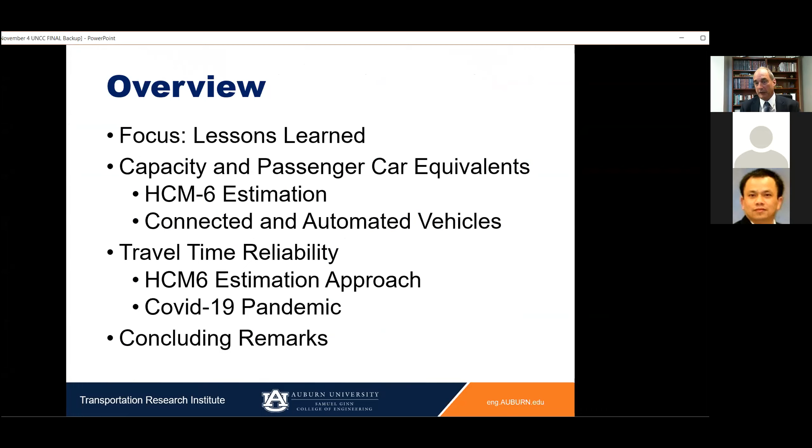I'm going to talk about some of the work we've done in the last 5 years. Our focus is going to be on lessons learned, so I'm probably not going to go deep into a lot of things, but more to give you some insight into some of the things we've learned in the HCM 6, Highway Capacity Manual 6, work, particularly related to passenger car equivalents and travel time reliability. And then I'll provide some concluding remarks.

In terms of capacity and passenger car equivalents from the HCM 6, as you all know, passenger car equivalents are a way of translating mixed vehicle flow to equivalent passenger car only flow rates. They've been around a long time, probably as long as there have been highway capacity manuals. What's interesting about Highway Capacity Manual 6 is that instead of using empirical data to do these things for freeways, they used the VISSIM microsimulation model.

In particular, version 4.4. When we started the work, it was about 2 years after the HCM 6 came out, and VISSIM 4.4 was no longer available, so we had VISSIM 9. The first thing we had to do was make sure the two were compatible. So everything you're going to see, we ran and made sure that the results we were getting from VISSIM 9 actually matched what was produced in the HCM 6. They weren't going to be exact because simulation has stochasticity in it, but we did make sure statistically they were the same. So we're getting the same capacity values, the same capacity adjustment factors, the same PCE values.

For those of you who aren't familiar, I'm going to go briefly into how the HCM 6 developers did their work. They created a VISSIM model with a level section and a grade section, and that model had 3 lanes per direction. They used a percentage of single unit trucks and tractor trailers, and assumed that all vehicles have a desire to go the same speed of 70 miles per hour. They used the VISSIM default values for car following. So that was basically the approach they took.

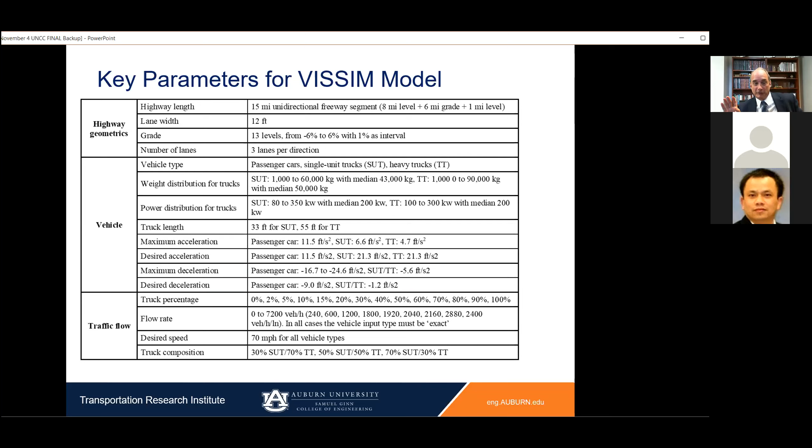For those of you who are familiar with VISSIM, there's a lot of parameters, and I'm just putting up this slide to show you there's a lot of parameters, and I'm not even showing them all. But if you're going to replicate what the HCM6 does, you really have to understand what they were using. One thing I wanted to highlight: in their analyses, when they developed HCM6, they actually developed it based on an aggregation interval of 1 minute. To my knowledge, this is the first time the HCM ever used anything different than 15 minutes to calculate capacity values, and I'll come back to why this is important later on in the talk.

So essentially what the developers did was develop a number of scenarios. They had passenger only conditions, 13 grade levels and 7 distances, giving 91 scenarios. They also had 13 grade levels, 7 distances, 13 truck percentages, and 3 truck composition levels, giving them 3,549 scenarios, for a total of 3,640 scenarios.

So they did a lot of simulations to get to what was in the HCM. You can imagine this is not a small thing to do. When we did it, we actually went through and automated everything. You can only imagine having someone try and run these one after another on VISSIM.

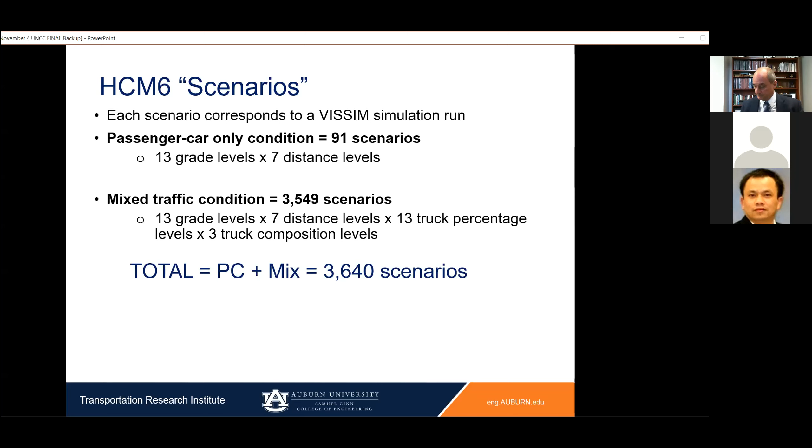To give you an example of how it works, how the PCEs were calculated, I'll take one example. One of the scenarios: 20% trucks, truck composition level 30% SUT and 70% tractor trailer, grade level 3%, grade distance 1 mile. So if you go to the HCM, you can look up the PCE value for that situation.

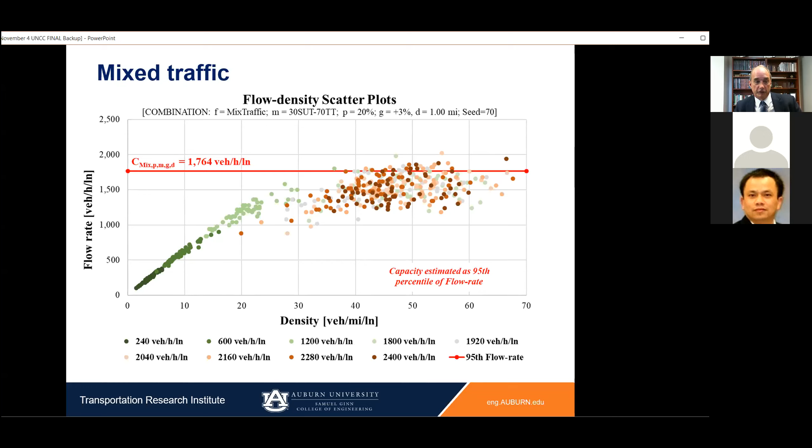So you did it for passenger cars, then you run the simulation for mixed traffic, again flow rate versus density. You find the capacity, in this case the 95th percentile value is 1764 vehicles per hour per lane. You then calculate the capacity adjustment factor, which is just the ratio of the two, it's 0.78.

Once you have the capacity adjustment factor, you can use the equation to calculate the passenger car equivalent. For this example, the HCM procedure would say that based on the simulations, one truck is equal to 2.43 passenger cars when you're looking at traffic flow for this situation. And of course, they did it for all those different scenarios and came up with different PCE values.

It's a bit more complicated than I'm putting on. If you look at the way they did it, it was a 5-step process. I just described the first 2 steps. They went through, did all those flow plots, got the capacities, and calculated the capacity adjustment factors as I showed.

It turns out that those capacity adjustment factors have a bit of variability in them—well, actually a lot. They weren't very smooth, so they decided to go through and smooth them out using a regression model. It was a fairly sophisticated regression model, with 15 parameters, so I'm not going to go into it. It's in the literature on how they did it.

When I first saw how they were doing it, I thought, why didn't they just put the equations in the HCM? And then when I saw the equation, I said, well, it's obvious why they didn't—we're not going to go and use 15 parameters to calculate CAF for PCEs.

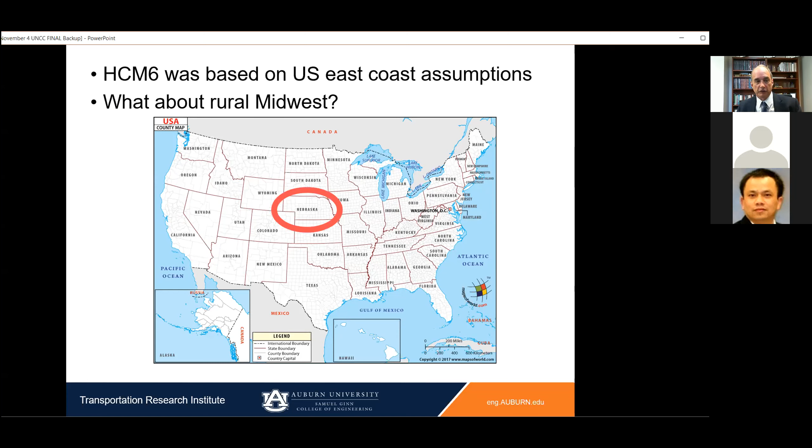HCM6 was based on East Coast assumptions, so it was 3 lanes—the VISSIM model was for the East Coast. We had a question about what about the rural Midwest, what about places that didn't have 3 lanes of traffic. Our focus was Nebraska, because that happened to be where I was working at the time at the University of Nebraska, Lincoln.

We went out and collected a lot of data on the interstate there. An interesting thing about the Western US is that there are high truck percentages—for where we were collecting, they ranged anywhere from 20 to 45%. For those familiar with the HCM, you know that the PCEs only go up to 25, so we were well beyond that in a lot of our data collection sites. And there are places in the Western US where the truck rates are even higher.

What did we find? We looked at free flow speed distribution. Remember, the HCM assumed one value of 70 miles per hour, essentially. For passenger cars, the average was 72 miles per hour. Out west in Nebraska and west of that, the typical speed limit on the interstate is 75 miles per hour. So this isn't all that surprising that the speeds were high.

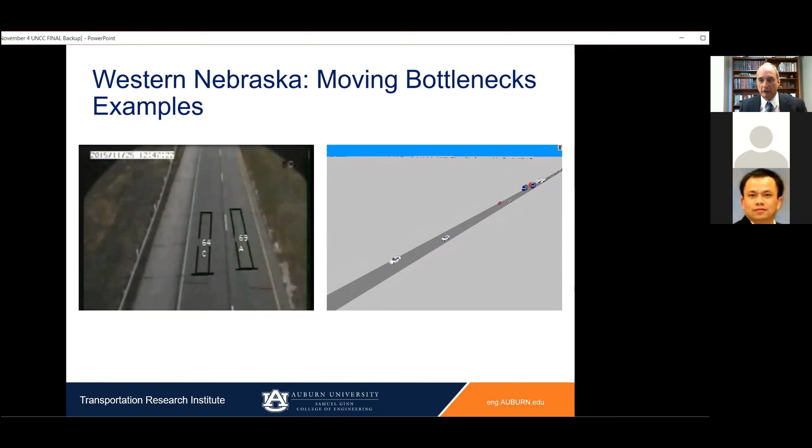Our goal was to go through and estimate the PCE for Western US conditions. So we wanted 2 lanes, we wanted our tractor distribution, we wanted to use the speed distributions we were seeing, and we wanted to calibrate the model to what we were seeing in the field. And we did all that.

This was the result. On this graph, this is the passenger car equivalents using the VISSIM approach, or the HCM6 approach. On the y-axis is the passenger car equivalents, on the x-axis is truck percentage. The different lines are based on different distances and grades. I'm not going to go into them, but basically the green one shows the HCM6 values, which comes out to about 2 per truck on average. In the Western US, the equivalent values are above that, in red.

You can see it varies based on truck percentage, but they're about 54% higher. So what we're seeing is that if you followed the HCM6 procedure in the West, the values were 54% higher.

There are a number of ways of taking this. You could say the HCM6 doesn't really apply. I take the approach that we now have a tool we can apply for our own conditions. So instead of having one set of passenger car equivalent values, you can tailor it down to your own region. This is our region, these are the type of things we have. It's not equivalent - Nebraska is not equivalent to New York, for example.

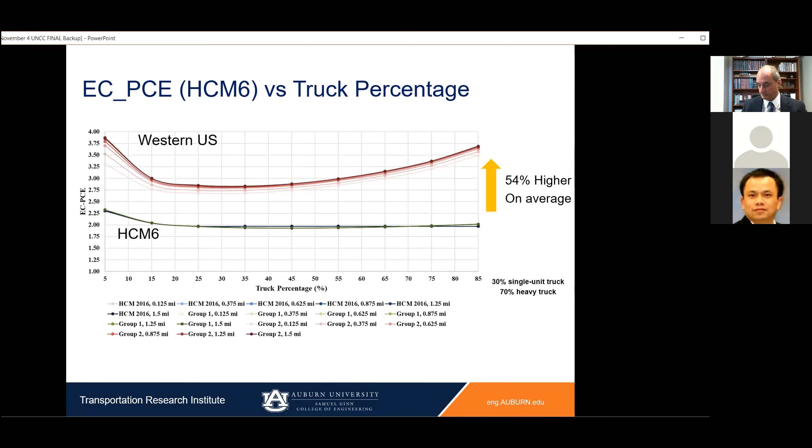So what are the lessons learned on what I just talked about? Well, we've now gone to this world where we're using simulation to model the HCM parameters and metrics.

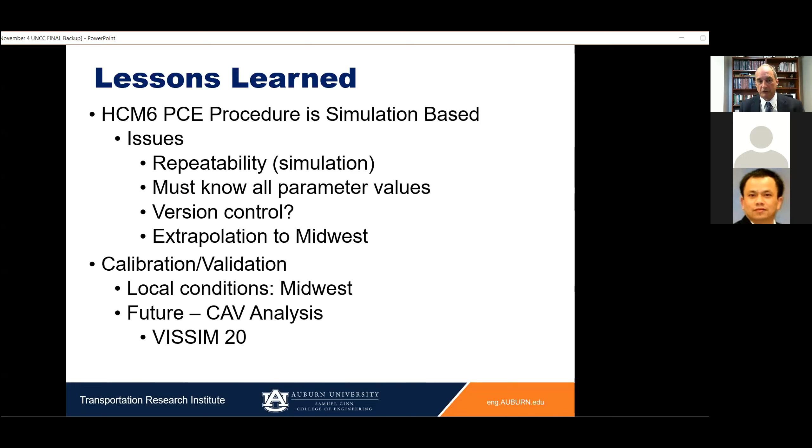The future, the connected and automated vehicles, which is what I was talking about in the title. VISSIM 20 allows you to model connected and automated vehicles. I just wanted to point out that you have to be really careful about just picking VISSIM 20, running it, and then comparing it to the HCM, because there are version control issues, and I'll talk more about that in the next few slides.

I also wanted to point out that this 15 parameter model is pretty complicated. We actually went through and took all our data and said, can we come up with a simpler model? We came up with one that had 6 parameters that looked at the percentage of trucks, the truck length, and the grade, the grade length and the grade itself, and came up with one that's fairly simple.

Getting to the compatibility issue, one of the things I wanted to talk about was VISSIM 4.4 is no longer available. That's what the HCM6 was based on. We just discussed previously that when we compared it to VISSIM 9, it worked really well. They gave statistically similar results.

However, when we looked at VISSIM 11 and VISSIM 20, further releases, when we looked at them on the modeling on mixed traffic, it worked out well. It compared very well to 4.4, but on the passenger cars, it didn't. So on the bottom graph here, you can see the red is VISSIM 9 or VISSIM 4.4 type results in capacity. On the left is depending on whether you're using 95% capacity or 100%. But the key point is that the orange and the blue, that's VISSIM 11 and 20, don't compare well to VISSIM 9. So if you just took VISSIM 20 and ran it and did the whole capacity thing again, you could get into trouble if you're comparing it.

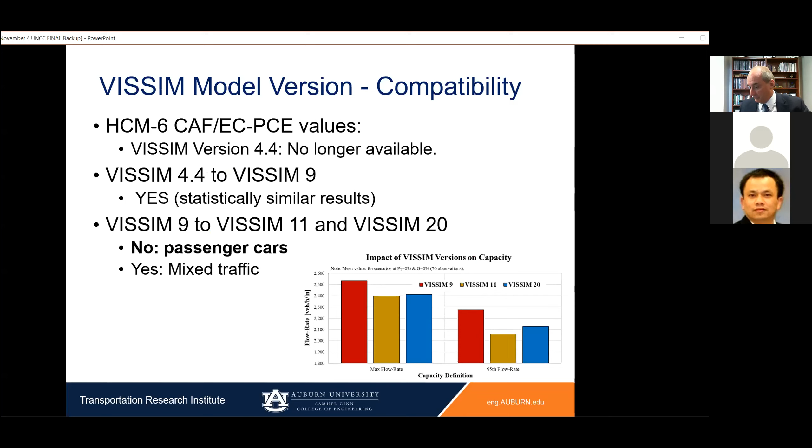So we kind of had an issue. When we looked at connected and automated commercial vehicles, we took the passenger cars as VISSIM 9 because we knew that. We took the capacity values because we knew that compared well to HCM6. We knew VISSIM 20, the mixed flow, worked well to VISSIM 4.4 and VISSIM 9. That allowed us to go, well, let's look at what happens when we do connected vehicles. We know we can replicate what we were doing before. Let's see what happens when you do connected vehicles. That's what we essentially did.

We were assuming all trucks were operating as CAVs. We assumed 100% market penetration. We took a platoon size of 7, and we compared what would happen for the CAV using the HCM model. And this is the results.

We have the passenger car equivalents on the y-axis. On the x-axis is truck percentage. We have a number of combinations you can look at: 0 grade, different grades, different grade lengths. That's what it shows. On average, it was 34% lower. I don't want to go into every combination because that could take an hour looking at all these things, but I wanted to get across a couple of points. Obviously, the CAVs increased capacity.

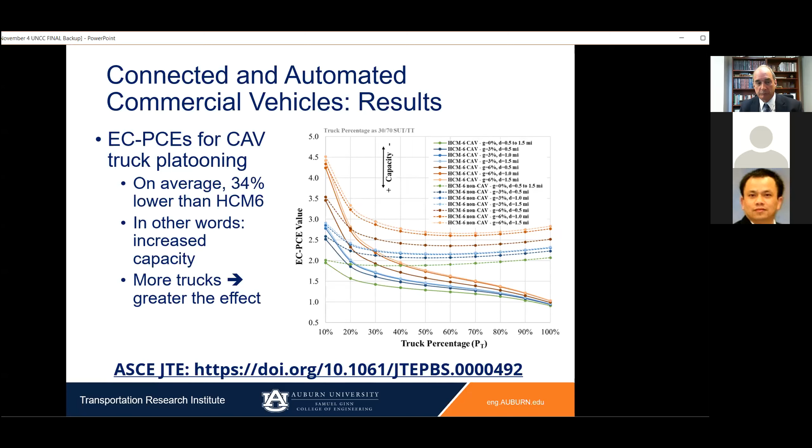In our analysis, it was 34% on average. Again, it depends on the grade length, percentage of trucks, and we did all of those types of sensitivity analysis. There's a paper out on it, and I put the reference there if you want to find out more. I think what I really wanted to get across is that, yes, you can measure CAVs, but you have to be very careful to compare apples to apples.

If we had just taken VISSIM 20 and ran it, we would have gotten different results when compared to the HCM than the way we actually did it, because we had checked to make sure that it was compatible with the earlier versions. So the question is, if we had done that, would the changes have been due to the CAV or the changes in the VISSIM code? That's sort of a warning for everyone.

Other issues that come up: common definition of capacity. I've always argued we should stick with the capacity. If it's 100% through the HCM6 or the HCM, it should be that way everywhere. And if we're using 15 minutes everywhere in the HCM, we should probably use it in this analysis as well.

Again, these are lessons learned, probably for HCM7. So as we go forward, how do we keep track of compatibility between versions of VISSIM? If we're going to continue to use simulation, how do we make sure that we're comparing apples to apples? How do we make sure we have the right definitions of capacity and aggregation? And how do we validate the simulation, calibrate and validate the simulation model for our local conditions?

The second thing I wanted to talk about in terms of metrics is still the HCM, but looking at travel time reliability. There's a lot of definitions - I'm just going to take the HCM 6.1. Historically, we've measured system performance by point estimates: mean travel time, 95th percentile travel time. Recently, I'll say the last 10, 15, 20 years, we've moved into travel time reliability. Lots of definitions - I can give you 4 or 5 off the top of my head.

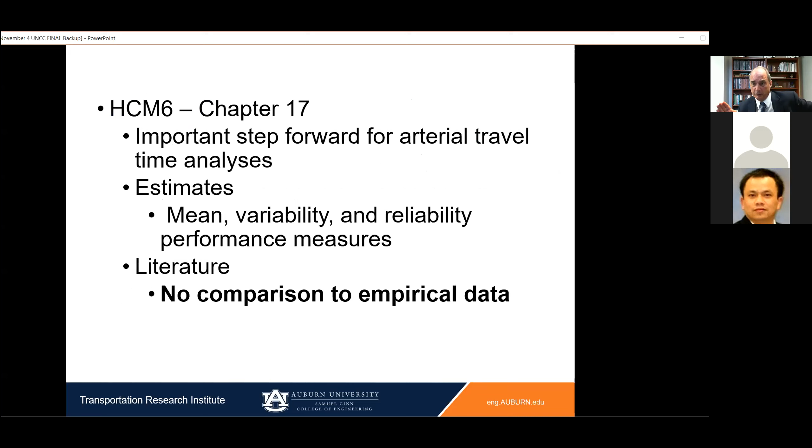So the approach is pretty straightforward. They have a way in the HCM6, as you know, of estimating travel time. What they did was put in a Monte Carlo simulation where they said, tell us how many rain days or snow days you have, tell me how many incidents you're going to have, tell me what your demand variation is like. You put all of that into their program, and you say I'm going to do weekdays through the year from AM peak, and it'll go through and estimate a series of travel times. You get to choose if it's 15-minute or 1 hour intervals.

But the end result is you come up with a travel time distribution. So you can estimate a travel time distribution, and from that calculate your travel time reliability metrics - a very straightforward way of approaching it. If you have all the information, you can use it to forecast, or use it to back-estimate. Because we had a lot of information, we could go through and check how accurate it was. We know, for example, on a certain corridor, how many snow days we had, how many incidents we had, and sometimes we know what the demand is.

So we can go get our own travel time distribution and compare it to the HCM, which is what we did. In travel time data collection in the US, historically it was done by government, speed detectors, loop detectors, radar, video. Increasingly, it's the private sector, cell phone location, Bluetooth data. There's a number of companies out there, Streetlight, ClearGuide, INRIX, that do it. I'm going to be using INRIX data today, but any of them could be used for what I'm talking about.

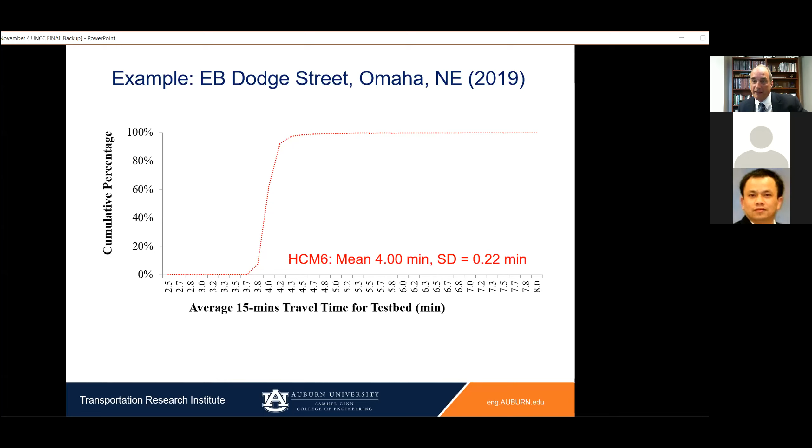We then went out and got the INRIX data for the exact same corridor for the same thing we were modeling, and we got that. So mean was close, standard deviation was not close. We did this for 9 other corridors throughout some urban areas, very high density, low level of service during the peaks, and none of them fit. Nothing really worked.

We did go through and find a way to calibrate it, so we could calibrate the model, and that can be done. I'll give you the reference for that. But the interesting thing was we could not use the HCM6 travel time reliability model and get results that even look anything like the empirical ones.

So lessons learned: we're no longer measuring performance by a single measure. That's probably a good thing. Reliability is a function of travel time. There's no clear definition, but it has to do with the mean, variance, and 95th percentiles. HCM uses simulation to model the travel time, but it wasn't calibrated to any empirical data. So I'd caution you from using it without checking whether it's valid or without validating it for your area.

Okay, and the good thing is now we have lots of travel time data. If you have travel time data, you can actually calibrate it. And I gave you the reference on this slide.

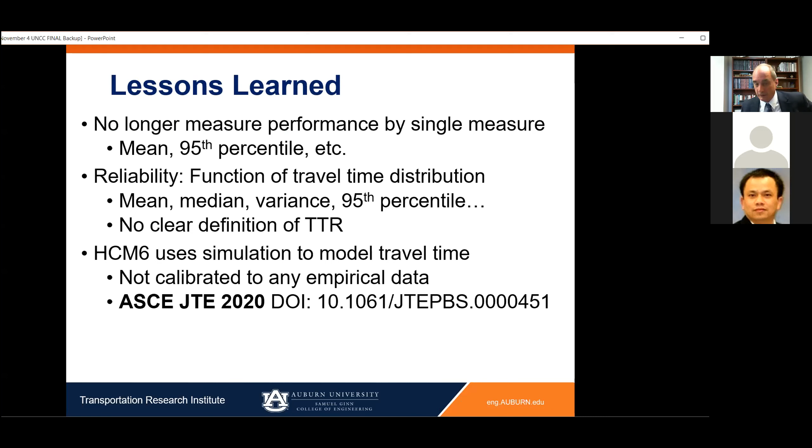So going from travel time measurement using HCM6, what I want to do is finish off with the COVID-19 pandemic and travel time reliability. We had the pandemic, there was a lot of things that went on. Is travel in the US roadways safer? Well, the number of deaths went down, but the crash rate went up, because the number of deaths decreased slower than the decrease in volume.

What we were interested in looking at was whether the travel time reliability was actually better, whether travel time is more reliable during the pandemic. But more importantly, we wanted to look at what metrics were best at capturing this. So let me show you an example.

We used INRIX travel time data. We used AM peak, PM peak, 15-minute subperiods. We used average travel times. And we looked at March, April, and May, the height of the pandemic 2020, and compared it to 2018 and 2019. So we looked at 4 corridors, 2 peak periods, 2 directions - 16 scenarios.

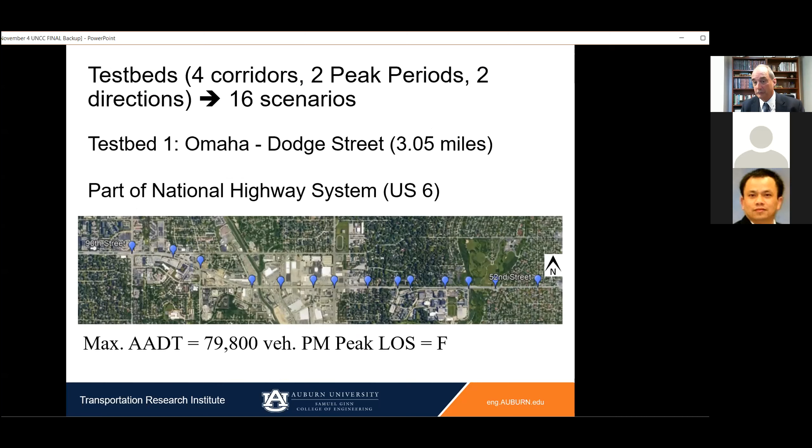This one I'm showing is Omaha Dodge Street, 3-mile section. It's part of the national highway system - I'll explain why that's important in a minute. And the max AADT was about 80,000 vehicles, so peak level of service was F. So it's a pretty congested arterial roadway.

We looked at this across, this is typical, the one I just showed you. We looked at all 16 scenarios. The average drop was 14% in mean. The average drop in standard deviation was 43%.

The coefficient of variation, which is a measure of the spread to the mean, dropped 34%. So our conclusion: no matter how you define travel time, it was more reliable during the pandemic, regardless of the definition. I don't think anyone's surprised by that. We had much less traffic. Your travel times are going to be more reliable, lower and with less spread.

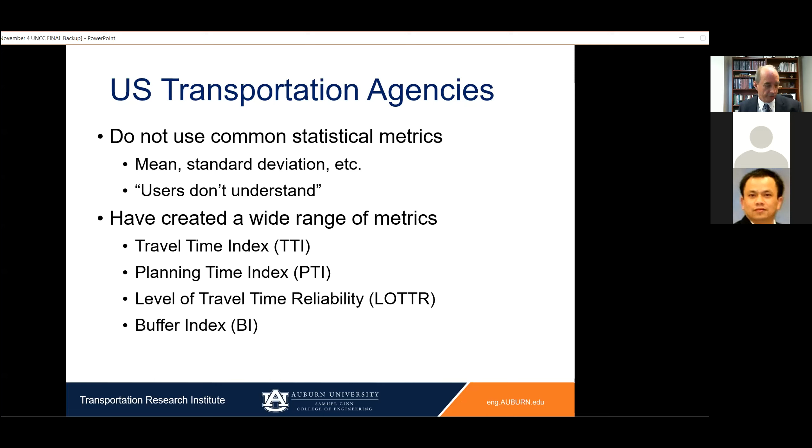What we really want to do is look at the metrics. US transportation agencies don't tend to use those common metrics I just described, mean, standard deviation. The argument is that users don't understand them. So people have created a wide range of metrics, travel time index, planning time index, and I'm going to talk about these in the next few slides.

Travel time index is simply the mean travel time over the free flow travel time. So how much more time will I need to travel a corridor compared to free flow conditions? If you look at the formula, it only considers mean travel time. If you look at the difference during the pandemic, the average drop was 14%, which was the same as the mean analysis. And it makes sense. The only thing changing is the mean.

So if you're looking at travel time index or you're looking at mean and you're comparing them from year to year, it's the same analysis. It's not going to change because the travel time index is just a mean divided by a constant.

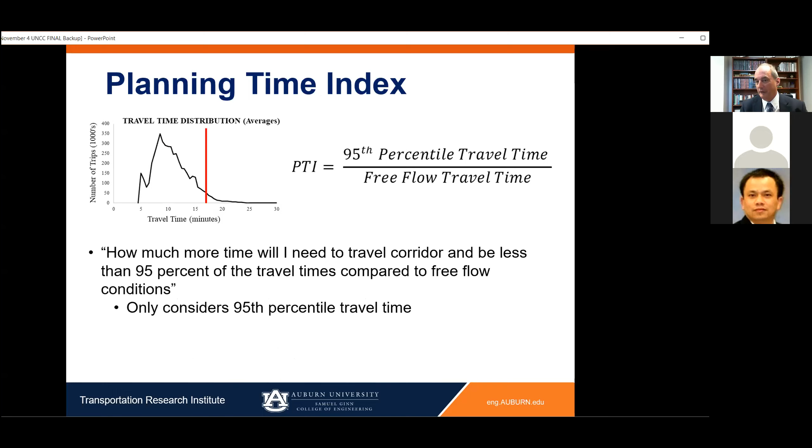Planning time index is similar. On the numerator, there's a 95th percentile travel time, still divided by the free flow travel time. It's trying to capture how much longer you have to get there if you want to be on time 19 out of 20 times.

It dropped during the pandemic by about 20%. So again, you're still getting this idea that there's more reliability.

The level of travel time reliability metric is defined as the 80th percentile travel time over the 50th percentile travel time. This one's important because it's used by the US National Highway System. So I just showed you an example from the US National Highway System in Dodge Street in Omaha.

This is required by MAP 21, by the FAST Act. This is how we measure reliability in the United States on our national highway system. If you look at these numbers from 2020, from the pandemic to the non-pandemic, the average drop was minus 3%. So it went down, but only 3%.

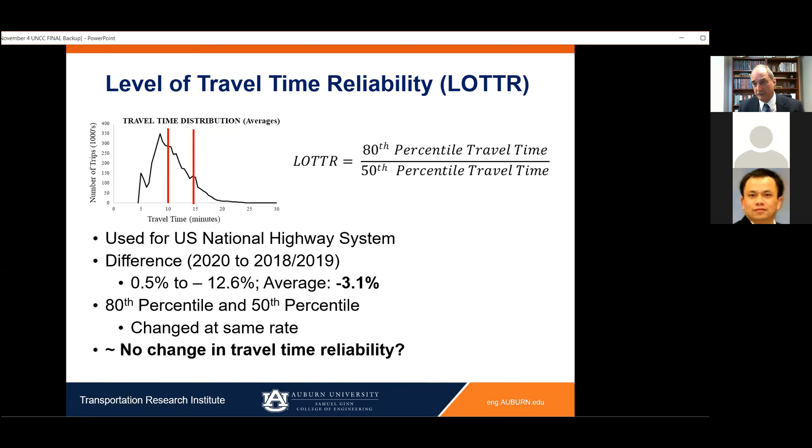Why was that? It turned out that the 80th and 50th percentile both decreased at about the same rate, which meant there was no change in travel time reliability if you want to use this metric. I say no change, 3%, very little change in reliability. So if you use this metric, you'd say, oh, there might not be too much.

The last one I want to talk about is the buffer index. It's a measure of spread: 95th minus the mean, divided by the mean travel time. It's a measure of dispersion and central tendency, very similar to the coefficient of variation I said earlier. Not surprisingly, it had the same kind of drop as the COV, about 34%. And remember, the argument is people can't understand the COV, but they can understand the buffer index. They're essentially measuring the same thing. So I'll let you decide whether that's a true statement, that people can't really understand it.

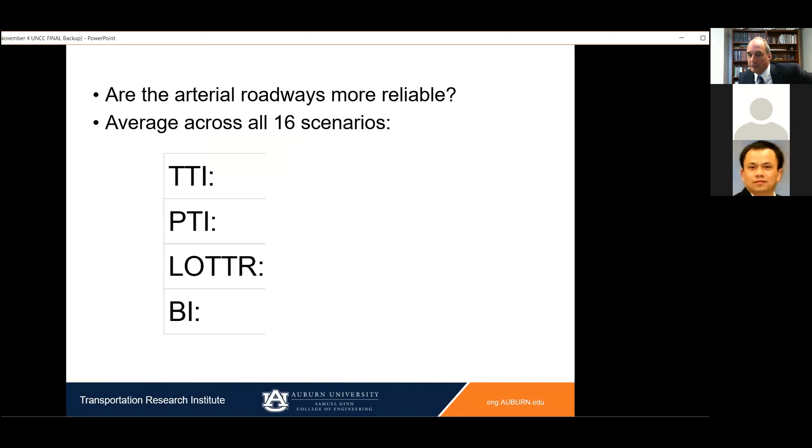So is the arterial roadway more reliable? Well, if you average across all 16 scenarios we looked at, you can see it depends on what metric you use. And the interesting one is that the LOTTR, which is the one used by the federal government to measure reliability, actually showed almost no change in reliability during the pandemic. I would argue, based on the results I just showed you, there was a huge change. Not only did the mean drop, but the variability dropped a lot.

So lessons learned, profound: COVID-19 had a profound effect on the transportation system. It's a natural experiment. So how do we measure system performance? Crash rates up, are we less safe if the number of crashes are down? Travel time reliability was the same if you use the LOTTR. So the lesson I take away from this is reducing complex systems to simple metrics can be misleading sometimes.

So know your data, know your statistics if you really want to make meaningful inferences. And so we wanted to show from the COVID data, you can actually identify which metrics you kind of prefer for identifying reliability.

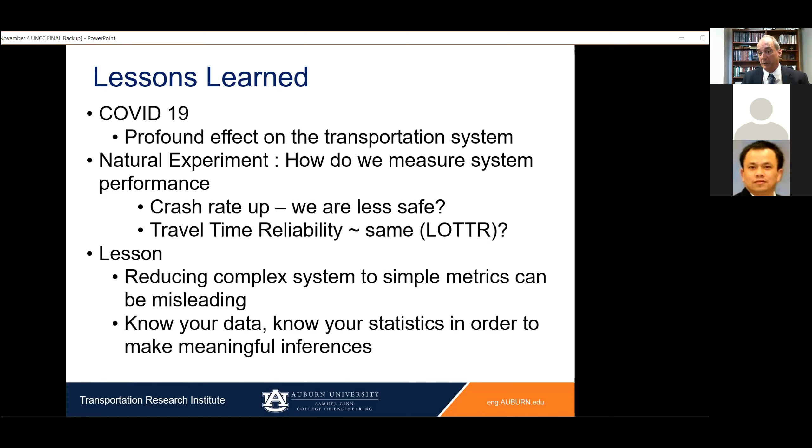My bias is always towards statistical measures, mean, variance, coefficient of variation, because they have very defined meanings, and we have very good ways of measuring them, and of making inferences about them.

In closing, I always go back to tell my students a famous quote from George Box: essentially, all models are wrong, but some models are useful.

I think looking at the HCM6, we're in a great opportunity. We have great data, we have great simulations, new ways of doing things. And I think it's up to us as a group, as a profession, to make sure that those microsimulation models are useful for the applications we're doing.

Are they calibrated? Are they validated? Are they internally consistent? We have a lot of opportunities to do things differently and better than we have in the past. And that's sort of what I want to end on in my talk.

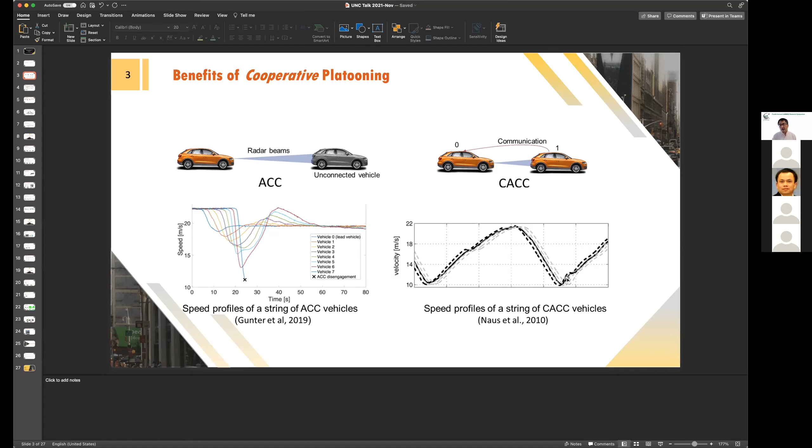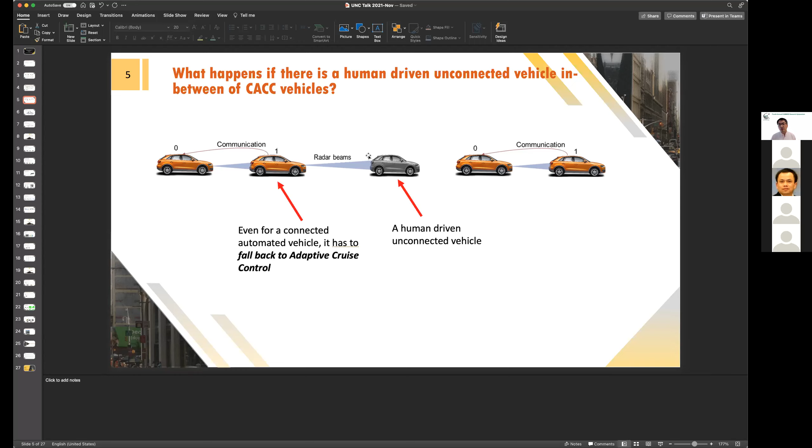The reason I want to show this picture is that when we have a platoon of connected and fully automated vehicles along with connected and human-driven vehicles, we were able to do CACC. But whenever there's a human-driven vehicle inside a platoon, this will create interference to the connected vehicles. Even though this vehicle is fully connected and capable of doing CACC, it has to fall back to adaptive cruise control, which has the downside of things I mentioned.

If you look at this as a whole platoon of vehicles, there's fully connected and automated vehicles, and also a connected vehicle driven by humans, and they are not really gaining benefit. So a CACC-capable vehicle running into an unconnected vehicle is forced back to ACC. If you are a connected and human-driven vehicle, you're not gaining much because you don't have anything to get from the preceding vehicles. If it's ACC, you are connected, but you cannot really have the benefit of smooth braking. So there's no benefit.

So the goal of this research was: we want to design a system where even though I don't have a preceding vehicle that is connected, further downstream there should be connected vehicles. Can I take advantage of that vehicle and get some connectivity from further down, doing something similar to CACC? And also, as a human-driven vehicle with connectivity, if you're getting something from the preceding vehicle, what can you do about it, and can you do better than human driving conditions? So the goal is developing two algorithms and trying to improve cooperative platooning along with human-driven vehicles.

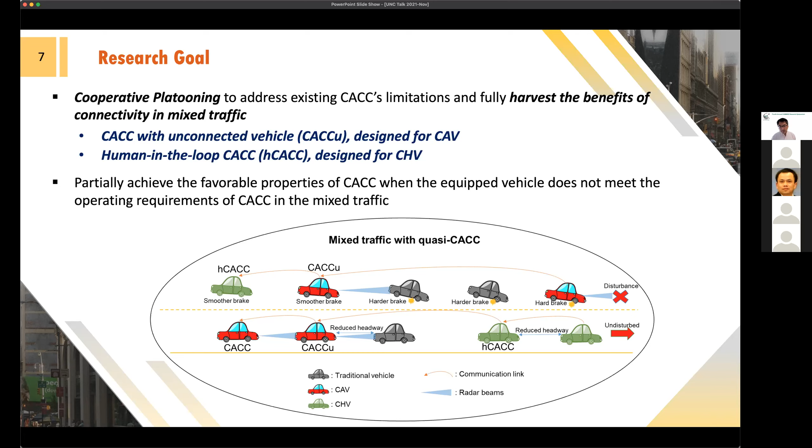So that's the idea. I want to show you the so-called CACC with the unconnected vehicle. This is a very common scenario until we have 100% market penetration rate. I don't want to go in depth about detail, but the idea here is we have an ego vehicle, which is a connected and automated vehicle, and its first preceding vehicle is not connected, whether this is an automated vehicle or not.

The best thing we can do is ACC, having sensors and trying to do feedback control, since ACC is also a feedback control running. And then further downstream somewhere, there could be an N+1 preceding vehicle. If it has connectivity, even as a connected human-driven vehicle, this vehicle can send its intended acceleration or deceleration information, and it can be used as a feed-forward signal. There's a feedback control going on along with the feed-forward signal. By combining these two, somehow we can make this vehicle do better than ACC. That's the idea of CACCU.

We make it a linear time-invariant system for easier control. The biggest black box is that we have no way of knowing how humans are going to behave. Luckily, there's knowledge of humans' typical headway and human delay in responding. On the car-following, there are two parameters for the human gains. These are typical. What we are designing is to consider this as some sort of car-following model, predicting the behavior based on the so-called optimal velocity model. When we predict, we know there are errors.

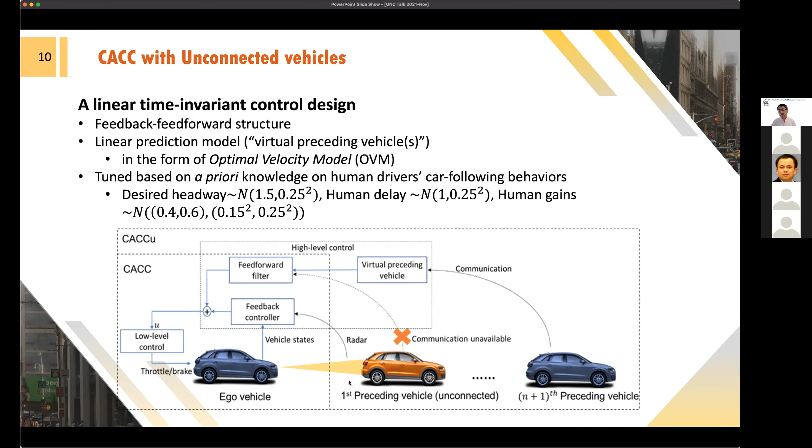What we are trying to do is achieve so-called string stable conditions, so we can optimize control of this feedback and feed-forward signal based on humans' behavior. We were able to do this about 97.5% of the time. Humans are trying to hit or slam on the brake trying to match the preceding or following vehicle that's probably about 2.5% of the time. Other than that, we were able to optimize and maintain fairly short headways.

This varies depending on humans' actuation delays and time lags and others. We were able to maintain headway less than 1.05 seconds to achieve so-called string stable conditions - a very important term in mechanical engineering. Cars maintained this without going much higher speed than the preceding vehicle, achieving string stable conditions. When ACC alone was used to achieve string stable conditions, research found it's about higher than 2.6 seconds. So maintaining string stable conditions with our control logic almost 97.5% of the time, which is what humans do most of the time, we were able to maintain a much shorter time headway while still making it work as a string stable condition. That's the essence of the algorithm.

We want to test out this algorithm using real world data. So first thing we did was using NGSIM data, which has about 620 meters long, tracking each individual vehicle.

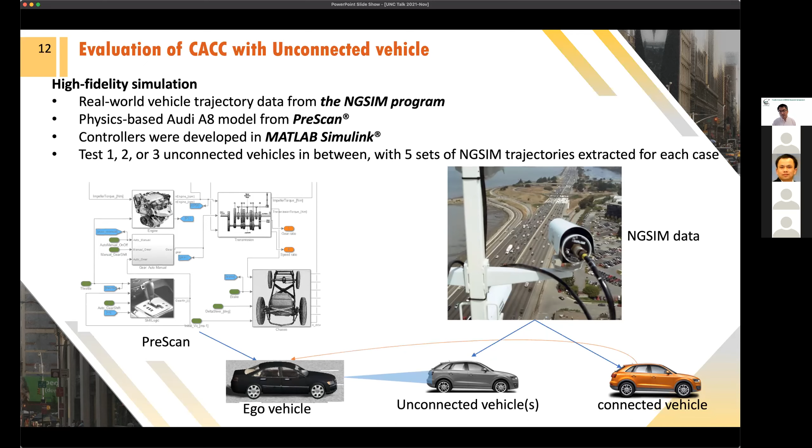We really want to do this with actual field tests, because when you use simulation, people see the value of a potential, but unless this is done in the real world, it's hard to quantify benefits. The challenge of real world testing, at least in the US, is that we don't have the cars. So I had time spent at KAIST in Korea, and they were able to do some testing that we were proposing, so we worked together on this.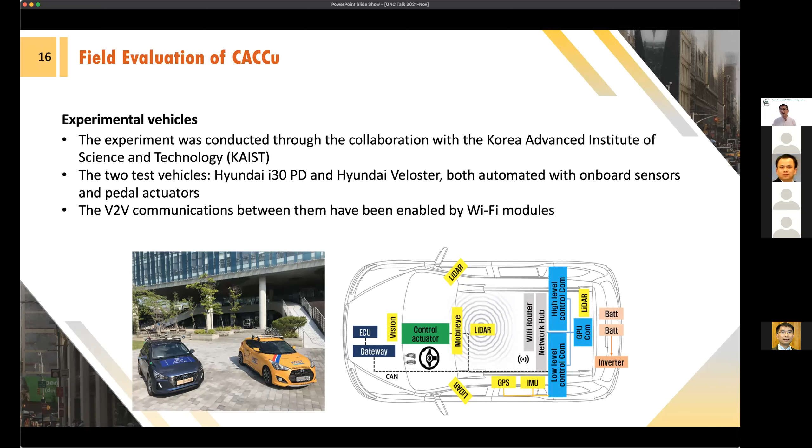They had 2 autonomous vehicles with connectivity. As you know, we need 3 vehicles, so we had to find a way to do this with 2 vehicles. I think this is one innovation we're adding to the experiments. In the mechanical automated vehicle world, they can actually record the vehicle maneuvers, how the vehicle moves, and repeat the same exact conditions. Small changes are in tire pressure and road surface friction factors, but the exact commands for acceleration and braking are given. So we're replicating almost identical situations, which is a good thing.

In that way, we really don't need a second preceding vehicle, because all this vehicle does is provide acceleration and deceleration commands as a feedforward signal to the ego vehicle. The ego vehicle uses sensors to understand its immediate unconnected preceding vehicle's behavior. So we're able to mimic, under ACC mode, human-driven mode, and CACCU mode of the ego vehicle, exactly the same conditions for the first and second preceding vehicles. This was a really good thing to try.

But without this setup, using just 2 vehicles in the real world, we might have had to do a lot of runs to make general observations. So this was a good thing to try out. We were able to do that for 2 scenarios borrowed from NGSIM trajectories, realistic trajectories, mimicking the same trajectories for the first 2 vehicles. Under the ego vehicle, we did CACCU, ACC, and even human drivers following the automated vehicle conditions across multiple trial runs. We found that CACCU compared to ACC gives about 60% better spacing error, 10% less acceleration changes, 6.24% better fuel consumption, and obviously a lot better than human drivers. This was a really interesting finding from real field testing.

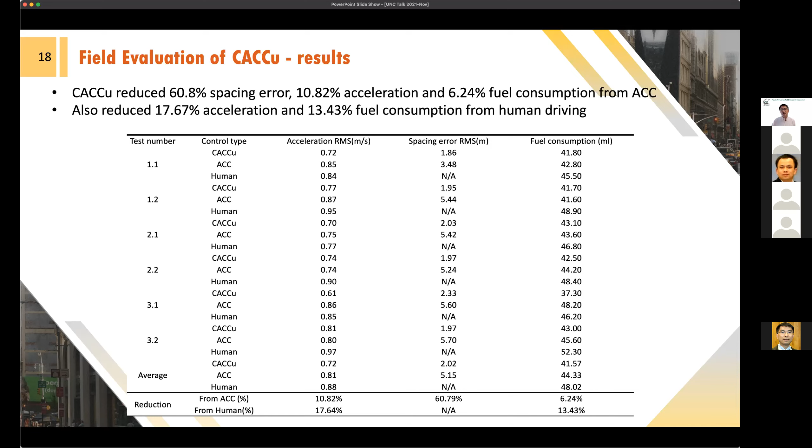The next one is when you are connected and human driven vehicle, and you are not really gaining much in terms of CACC because you don't have fully automated conditions. You might have a simple acceleration and braking ACC type maneuver capable in the vehicle. Can we do better than human following the connected vehicle?

So if you think about human following a connected preceding vehicle, versus a non-connected human vehicle, it's basically the same thing: you accelerate if you feel too far away from the preceding vehicle, closing the gap, then getting too close, you slow down. Humans do this all the time, and the problem is the human is not perfect.

So their acceleration and deceleration always over- or undershoot, not maintaining string stable conditions. Our research is: when the immediate preceding vehicle is connected, it can tell you what it's doing in terms of acceleration and deceleration. Let's call that a feed-forward signal. If we can get that information, we can potentially create a complementary adjustment for human drivers.

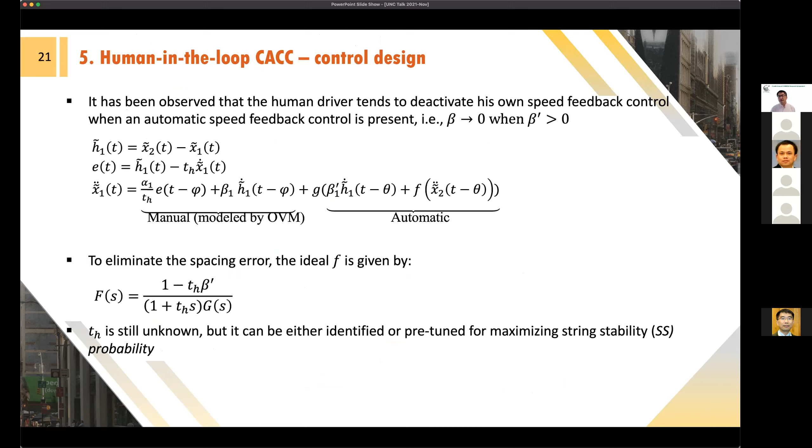So that's the idea. For this one, we were not able to do a field test, but we used a driving simulator. Again, one component we use is a vehicle dynamics-based driving simulator. When you give acceleration via the gas pedal, the software simulation mimics low-level throttle and braking levels, and that transfers into power into the vehicle dynamics, so the vehicle moves at different speeds based on accelerations. That's how we did it.

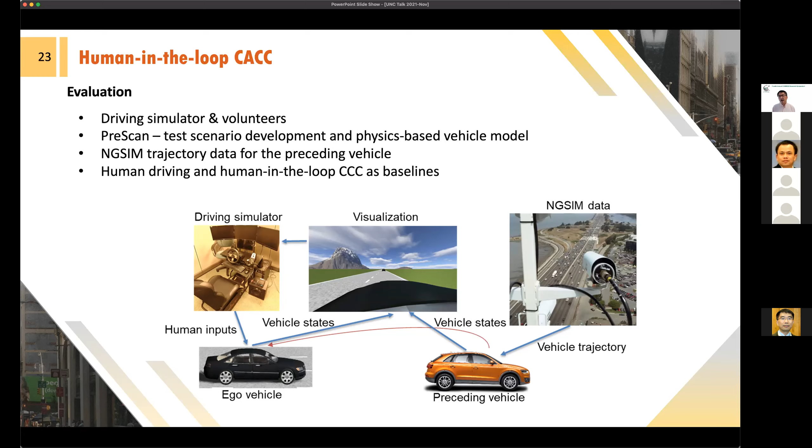So that's pretty much what I want to share. Obviously, the algorithms, this is a very efficient and systematic way of doing platooning, cooperative platooning under human-driven vehicle conditions. We cannot do better than CACC, but we are able to do a lot better than ACC or human alone cases.

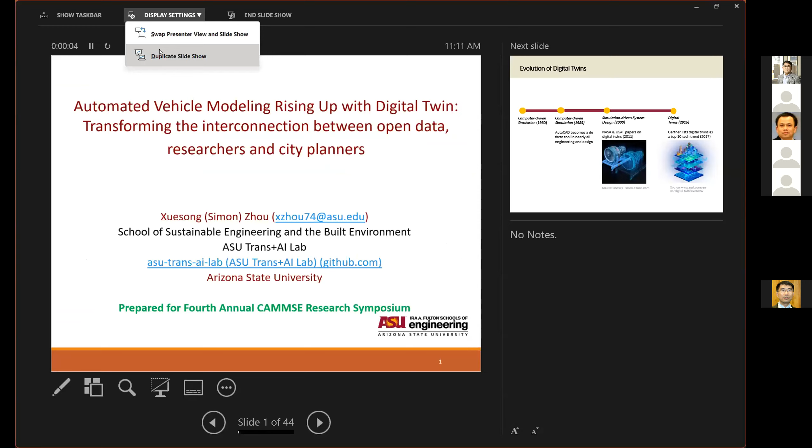Okay, great. So thank you for the invitation. I would like to report our current progress, in the interest of time here, I will go very quickly with about 40 slides. The title here is about automated vehicle modeling, and another attractive term is digital twin. So how we can make these two work together, in particular trying to establish a good connection between open data, our researchers, and city planners. So here is my report.

Recently, we already know the terminology of digital twin. Essentially, they come from 1960s computer-driven simulation. In 2000, simulation-based system design from NASA. And recently, thanks to different companies, they try to promote the digital twin as a concept for the smart city.

As a transportation research team, I would like to report the following four or five different topics: background on digital twin, how we can use the open specification of GMNS to build an open modeling community, our effort of building virtual track-based micro simulation, and my talk will be closed by a number of discussions on critical research issues.

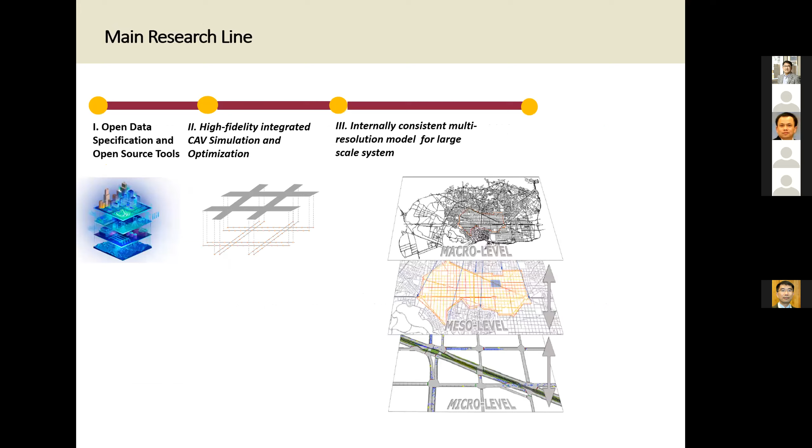As I mentioned in the early introduction, we do apply the different tools in the statewide model, and we have different applications in different cities. But the challenge is always case by case. It's difficult for us to apply that to a large scale or in a consistent way.

Thank you for the recent effort from the Zephyr Foundation and the Volpe Center from USDOT, Federal Highway. They all come to the same agenda: let's have a common modeling interface or specification for network. So I encourage you to look at the Zephyr Foundation GMNS data format, which covers macro, meso, micro specification of network modeling, and has excellent support for signal timing, thanks to all the contributors and committee members here. With that kind of data format, we are able to transform this ad hoc connection in our open source tools to a more systematic system software coupling.

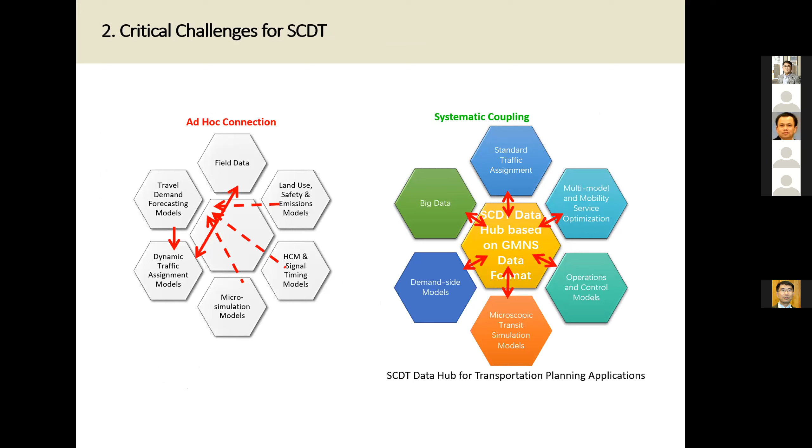I don't want to enumerate all the different components, but this gives us a good implementation foundation to move forward. So let me give you a list of the different tools our team has been promoting in the last two years. We use OpenStreetMap data as a source.

We also use the land use data from OpenStreetMap to create traffic zones and create a very quick way for you to establish the transportation demand between different zones.

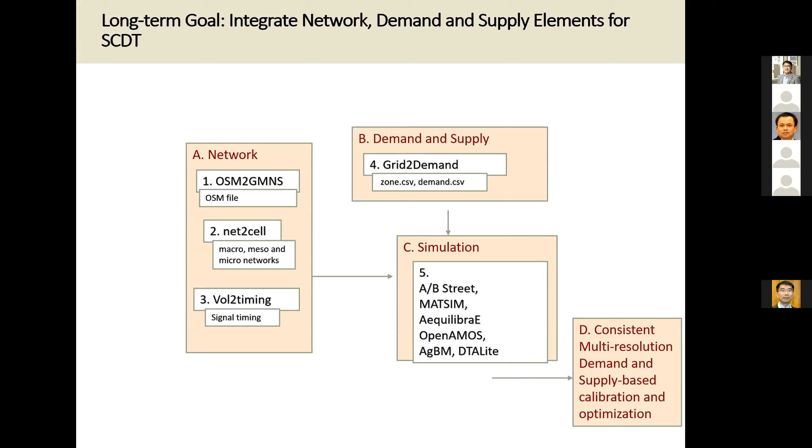So with all this pipeline, we have category A as network creation, B as demand supply model calibration, C as simulation, and these are all the available tools, so you can see how open data and open source tools can work very closely. D is something I want to highlight: it's easy to say different software modules, but it's difficult to look at the consistency between the demand and the supply and further optimization.

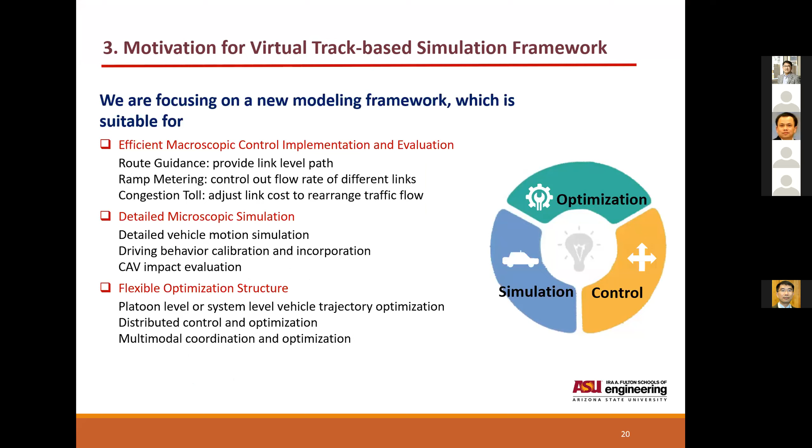My second topic is, by using OpenStreetMap as data support, we are able to establish a multi-resolution network representation for CAV simulation and optimization. We all know Sumo is one of the leading packages now. They use space-continuous, time-discrete vehicle simulation, which has very nice features. But the challenge for us as researchers is that we want to look at the opportunity for optimization and distributed traffic control. We want to have more control on this network-based representation.

As in the excellent presentation by Professor Brian Park, we are also interested in incorporating this kind of train or track-based modeling framework. For example, I list the statistic here: the train is a very safe vehicle transportation mode compared to highway driving. So, thanks to NSF support, we are able to map the physical road system into what we call the cyber track, and all the different cyber tracks will be represented in terms of lane changing, emergency response, and car following, and this is the network foundation for us.

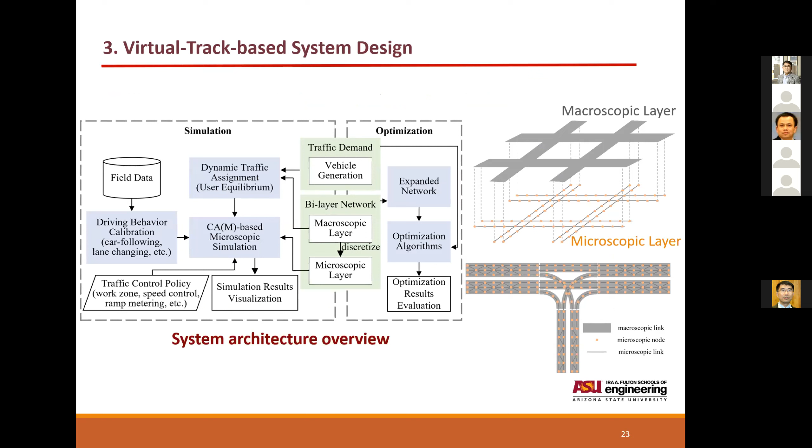So we are still in the progress of developing the consistent tool with the regional level representation, cell-based representation, 7 meters or 20 feet at our segment for the different small or medium scale networks. So if you're interested, you can look at our open source tool, Net2Cell.

We are able to, for any city of the United States or any country, convert the macroscopic network from OpenStreetMap to the MESO dynamic traffic assignment simulation network, with all the movements representing the traffic signal control, and to a cell-based network for you to model lane changing and car following cases.

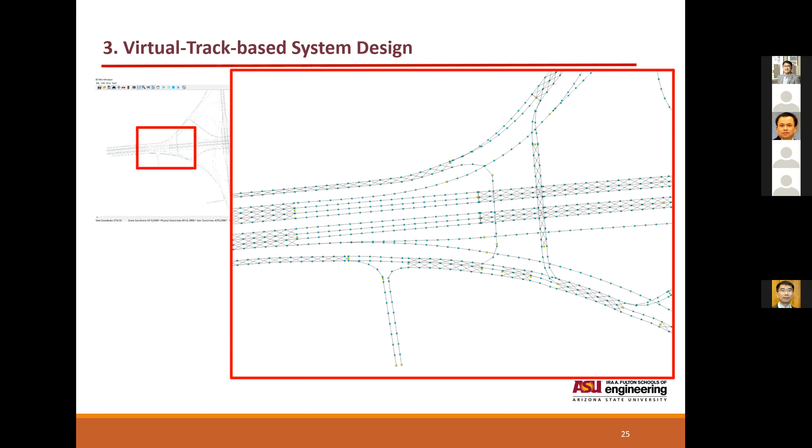So here is one simple example. You can see how the different resolution looks like, and a zoom-in view to show you how we can use the lane changing arc to control the potential conflict point and the potential point for us to optimize the model.

If you look at this cell-based representation, you can model the lane changing as the route choice behavior to calibrate how the different routes are being selected for a segment of this freeway bottleneck.

Okay, so I think many students will be interested to apply your knowledge of utility function to this case, how I select the different lane changing routes. So these routes are not link-based routes, they are the cell-based routes.

And in the full consideration of waiting time, maneuver cost, and the estimated cost from a current point into the future.

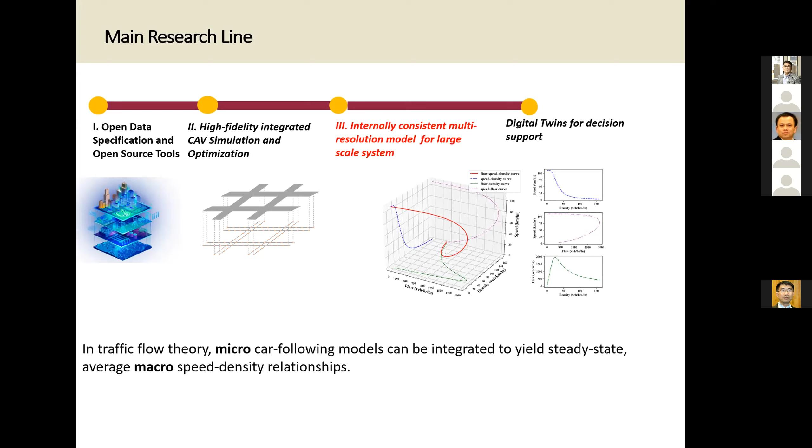Okay, so with this third topic, I just talked about using the car following simulation platform. Actually, the most interesting research question we have is how we ensure consistency. I have different network representations, and different networks have very different characteristics in terms of flow, density, and trajectory.

So we always want to go back to the root of our development for the physics, or for the larger scale system. We need to have a simple car following model, simple traffic flow model, simple volume delay function to explain the reality. I think the excellent example we all know is the derivation between consistent Greenberg flow density relationship with the car following, the third GM model.

I don't want to enumerate all these derivations for you. Just try to make sure we know there's consistency from the very early on, the consistency between the fundamental diagram of V-K relationship and the car following model.

So in this research direction, my team has been working on different traffic flow fundamental diagram calibrations. Recently, we promoted one of the 3-parameter models, which is called S3, to calibrate this traffic flow model with free flow speed, congestion speed, and one of the parameters to adjust the capacity.

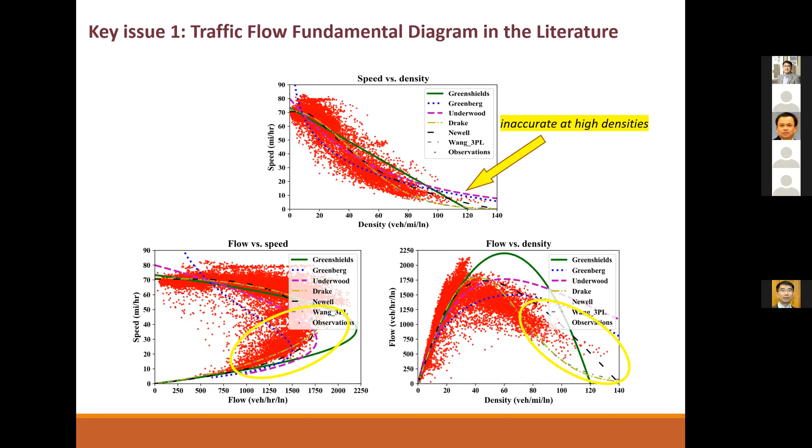So this paper has been published in Transportation Research Part B recently. Using only 3 parameters with a very parsimonious model, we are able to adjust the degree of flow reaching the optimal capacity. We can use an example of different cities with mixed traffic conditions to show how the capacity can be reached with a different mix of vehicles.

That model has a very consistent car following form, and with a different n as a coefficient of capacity maximizing, we are able to show that if we have two things in mind, car following model and the speed density relationship, we can design the one coefficient to control the output of the capacity or the flow discharge rate, and the detailed car following model in our traffic simulator.

So we are able to calibrate this model for a long corridor along US 101. And at the current stage, I'm happy to report that our proposed revised model is able to produce almost one of the best results across the different regimes.

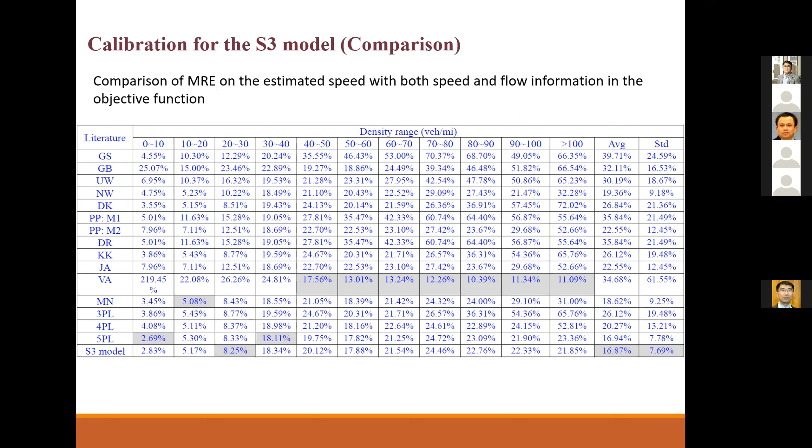So another topic I always want to discuss as a closing here is volume delay function. Volume delay function has been there for almost 60 years, and we need to understand the volume delay function typically has a difficulty to deal with V/C ratio greater than 1. So by using this fundamentally important concept of capacity, we try to measure the congested demand in this V/C function.

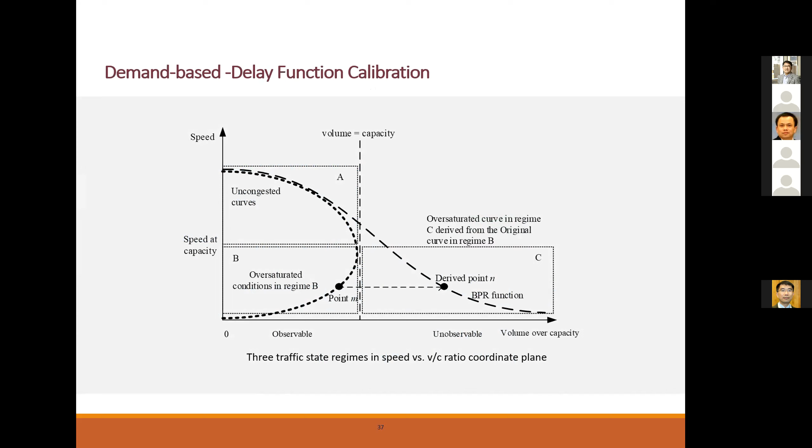So to illustrate that, I try to show using this example. We use the speed and capacity from our fundamental diagram as a cutoff value, and then we can define the congestion period precisely between T0 and T3, and then we use the corresponding volume to calculate the congested demand. So by doing so, we are able to overcome the previous issue of V/C greater than 1.

I also want to just raise awareness of excellent research by Dr. Newell in 1982. He was able to use a polynomial arrival curve as a foundation to derive what is related to the traffic delay function.

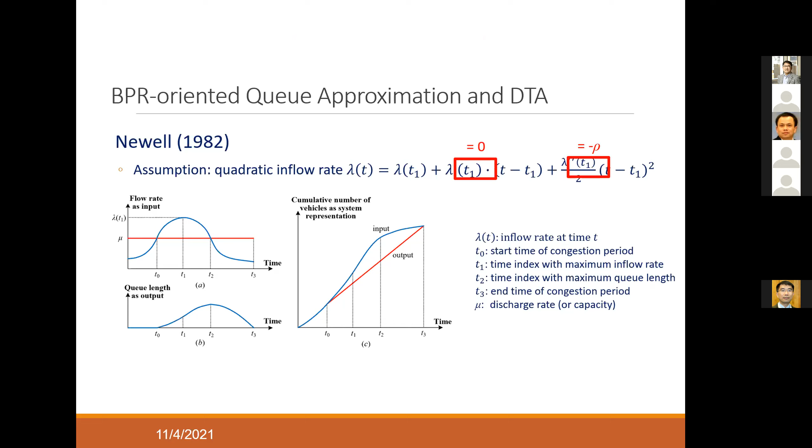Due to the interest of time, I'm not going to go through all the details, but essentially, once you have a quadratic inflow rate and a constant discharge rate, you will be able to define the congestion duration very precisely and determine the key parameters of first order, second order approximation, and then derive a form very similar to the BPR function. Here, alpha equals a certain functional parameter, and beta equals 3.

The reason beta equals 3 is the polynomial arrival curve is quadratically distributed, so it's a second order arrival curve, whereas we know the typical beta equals 4.

Recently we've been using this approach, and with the extension we're able to propose a new type of cubic polynomial arrival curve, which we can use to approximate very nicely the time-dependent travel time and time-dependent queue length. Here I try to show some early preliminary results along Interstate 395 in the Washington, D.C. area.

The key message is we need to apply calculus into our simulation. Agent-based simulation is not sufficient. We need to try to use these high fidelity analytical forms to establish a consistent representation.

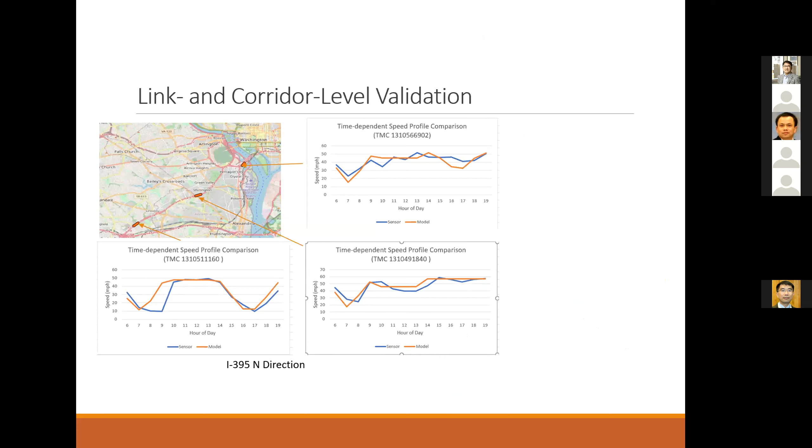Here is one more slide to show our current progress of applying the dynamic traffic assignment model for the Washington, D.C. area.

With that, I think my message is clear: let's try to work together to use open data standards and open source tools to build the data foundation, a consistent data foundation. Then we can look at system multi-resolution modeling tools to build an essential consistent representation across different resolutions. The last step is to build a digital twin for decision support, which we can use for many important applications like programming of projects and planning of long-term initiatives.

With that, I would like to close my presentation. Thank you for this great opportunity. Our open source teams are always interested in collaborating with different researchers and planners. I think with good theoretical foundation and open specification, we can do something much more exciting and great in our future. Thank you.

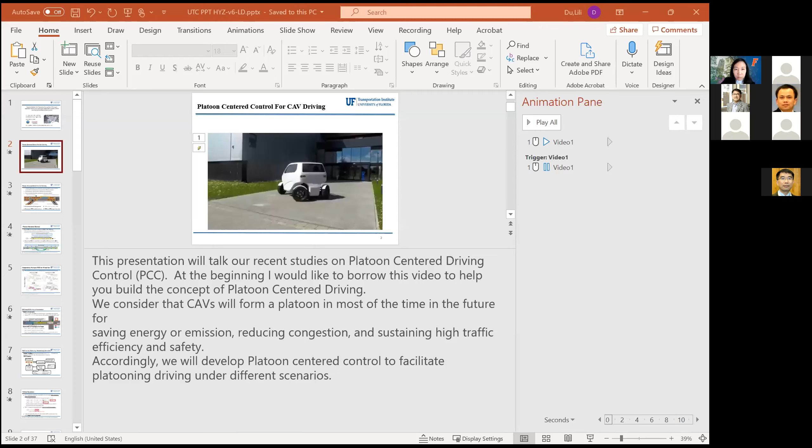It's my great pleasure to share our recent study titled System Optimal CAV Platooning Control for Eco-Driving at Signalized Intersections, built upon hybrid MPC system, online learning, and distributed optimization. Again, this is Lily Du, and I'm an associate professor at the University of Florida. This research is supported by NSF and also Toyota Infotech.

At the beginning, I want to use this video to build up some concepts regarding platooning centered control.

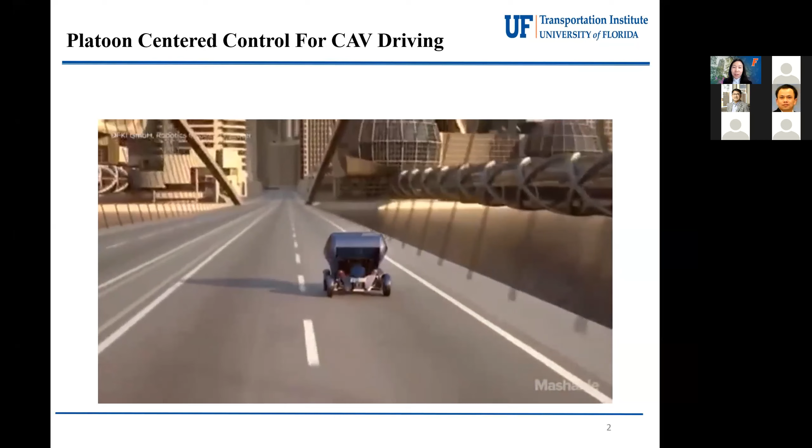So most likely in the future, vehicles will become very fancy, connected, and autonomous, driving on the road. We think that they will have some intent to form a platoon, and take advantage of this platoon so people can relax and move more efficiently and smoothly.

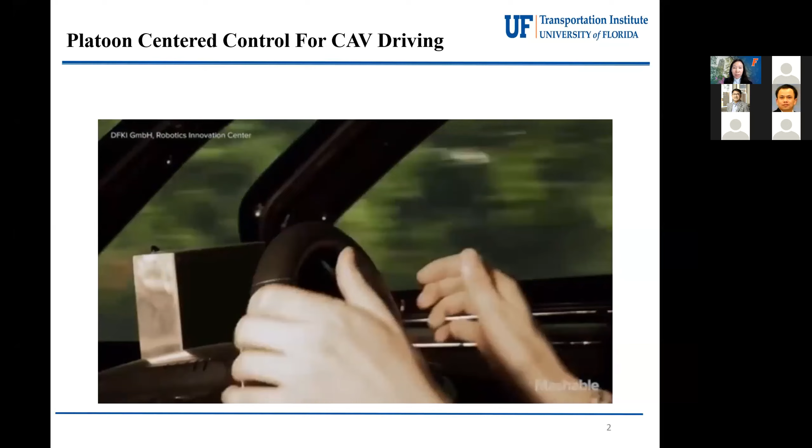However, we need to deal with different scenarios, such as enabling one vehicle to join the platoon smoothly. Also, at some point, some vehicle may have a different journey and need to leave the platoon. We have to give the platoon the capability to enable this kind of request.

So I will stop the video here and move to the presentation.

With this concept, the main thing I want to raise is we want to do platoon-based traffic control, or platoon-based driving control. With this idea, each individual platoon would be considered as a unit or system, and then we develop platoon-centered driving control to instruct the movements of the platoon in different scenarios.

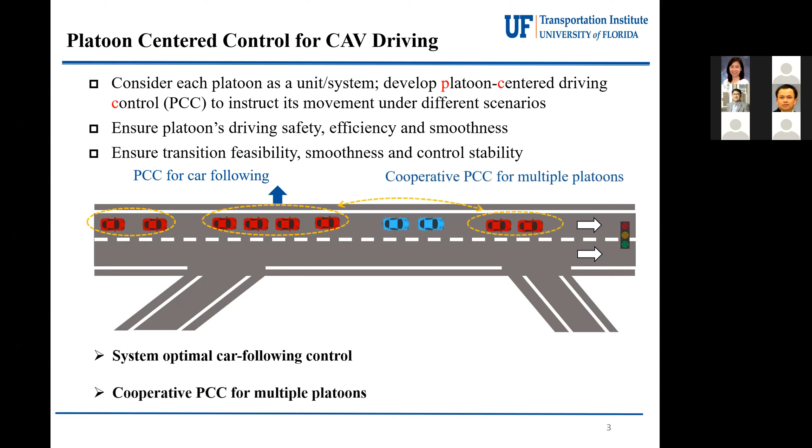This will include car following behavior, and also maybe two different platoons want to cooperate their movements, lane changing requests, as well as platoon merging and splitting.

We also want to consider how this type of platoon-centered driving approach handles intersections, and how the platoon can go through the intersection smoothly.

So for the presentation today, I'm not going to cover all the scenarios we studied, and I will mainly focus on some of them.

At the beginning, we start with a very simple scenario: a pure CAV platoon, and we want to control its car following behavior so that this platoon can move smoothly, efficiently, and safely.

To do that, we developed a centralized MPC. I will introduce MPC control later. Basically, the centralized MPC controller will develop the movement instruction for all the vehicles in one platoon systematically and optimally.

We also noticed that for vehicle platoons driving on the road, it is a self-organized system. There isn't a centralized unit that can help to do this kind of movement control. So we further developed this approach as a distributed optimization algorithm.

Basically, we will split the computation load to individual vehicles, and they will work together to generate the system optimal movement control and make the platoon move with the objective we desired for the centralized MPC control. This work has been published in Transportation Research Part B, and the reference is given at the bottom of this slide.

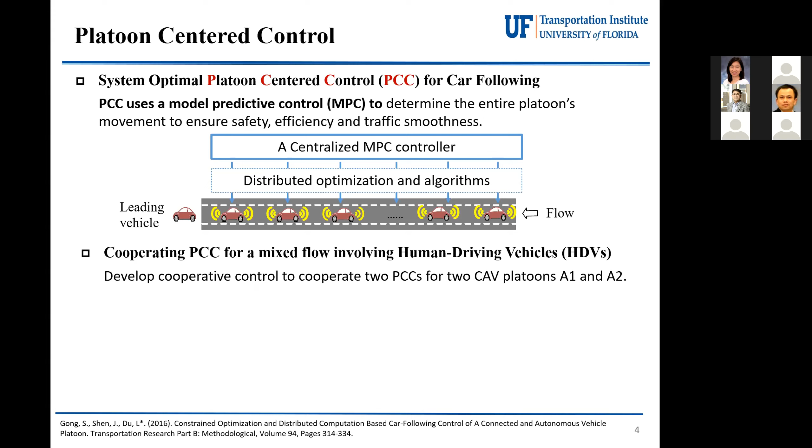After that, we move to a little bit more complicated scenario as we consider a mixed flow. In this mixed flow, there are two platoons, basically a leading platoon A1 and then the following platoon A2. These two platoons are distinguished by a human-driven vehicle.

We would like to cooperate the movement of these two platoons so that we can make the traffic smooth and efficient. To do that, building upon the PCC we developed for individual platoons, we noticed that the very important issue is how the following platoon can predict the movement of the first leading platoon by considering the delay generated by the human-driven vehicle.

To address this problem, our study will develop an online learning algorithm so that we can learn this kind of delay generated by the human-driven vehicle adaptively, and transfer this delay information to the following platoon A2, so that they can respond to the movement of leading platoon A1 efficiently, considering this delay. This work is also published in Transportation Research Part B, as shown at the bottom of this slide.

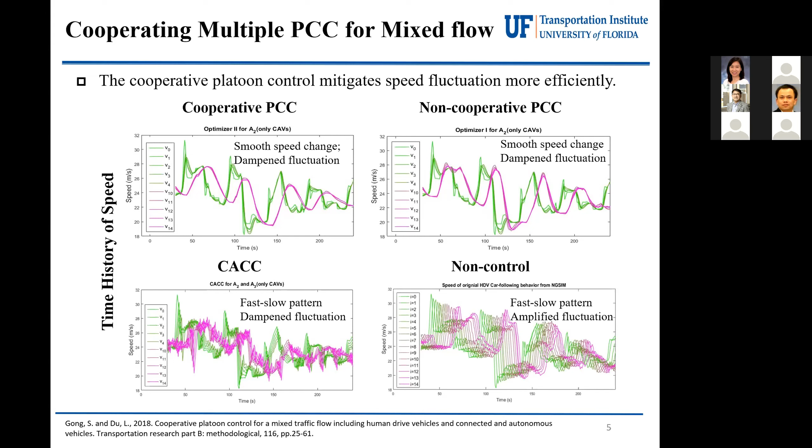Further, we want to move to another more complicated scenario: if a platoon with our PCC control approaches an intersection, how we can manage the trajectory controller for those platoons so that they can go through the intersection smoothly and efficiently.

To do that, we will develop a hybrid MPC system. At the beginning, once the mixed flow platoon is approaching the intersection within a certain range, they can communicate with the traffic signal. We need to decide, with a given left green time, if this platoon entirely can pass the intersection or not.

So far, all I've talked about is mainly our conceptual idea. Next, I'm going to move to the math part and show you how we implement those ideas mathematically and rigorously. At the beginning, I want to give a little discussion about MPC control.

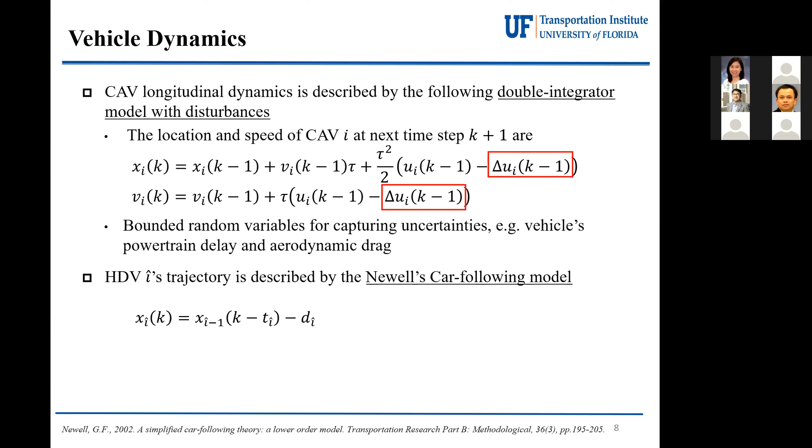So for CAV longitudinal dynamics, we use a double integrator model to describe their movement. This is standard, but a new point I want to mention is that in our vehicle CAV dynamics model, we involve a random variable, delta U, to capture the uncertainty resulting from vehicle powertrain delay or aerodynamic drag. This will definitely cause some difficulty for us in the future to ensure control stability and feasibility.

We developed some mathematical proof to ensure it. Next, for the HDV, we use the Newell car-following model to estimate the movement of human-driven vehicles. The two critical parameters that represent the reaction delay and the distance delay actually vary according to different human-driven vehicles and different types of driving scenarios. They are not constant values, and they actually represent another level of uncertainty for this kind of platooning control.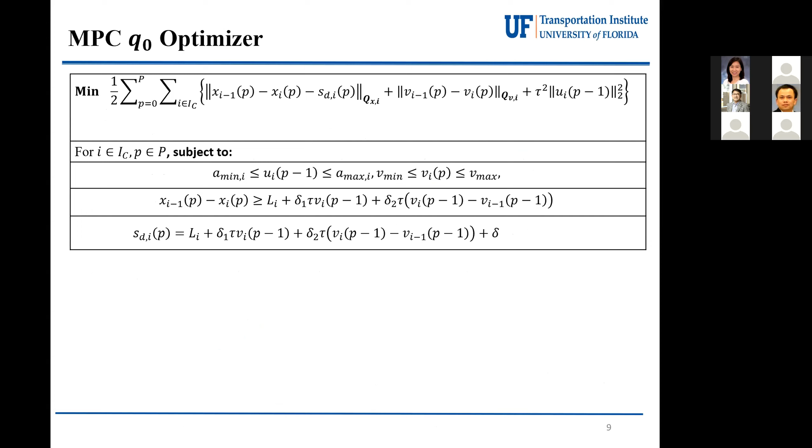Next comes our MPC control. The first one is our MPC Control Q0. We will mainly talk about the optimizer involved in this MPC Q0. This MPC Q0 will help get the platoon moving close to the intersection. The main idea is that the objective function will consider the speed, the spacing error, the speed fluctuation, and acceleration input. They will respectively help traffic smoothness, riding comfort, energy saving, and emission reduction.

Regarding the constraints, the first one is standard—it means the speed and acceleration will be limited within certain bounds or limit ranges. For the safety spacing, I want to particularly mention that we use an adaptive safety spacing constraint by factoring in the leading vehicle speed and the relative speed between adjacent vehicles. This adaptive safety spacing will help us efficiently use road capacity in urban traffic conditions.

Accordingly, we apply the same idea to the objective function, developing the adaptive desired spacing in the objective function to mirror the spacing errors. I want to particularly mention that in the safety spacing and adaptive desired spacing formulation, we involve parameters such as delta 1, delta 2, and delta, to ensure control stability, feasibility, and also control and platoon smoothness.

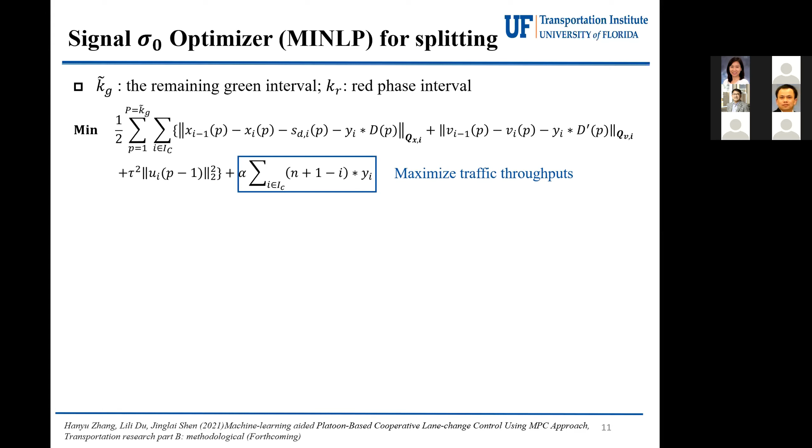Besides the constraints regarding safety, speed, and acceleration, we introduce a binary variable y to represent the splitting point, along with corresponding constraints, so that we can make sure the platoon is only split before a CAV, because we cannot control a human-driven vehicle, so we are not supposed to split the platoon before one. We also want to make sure the splitting point we choose makes the leading subplatoon A1 go through the intersection within the current green interval, while the following subplatoon A2 cannot pass the intersection until the next green interval.

I want to mention that this optimizer for finding the optimal splitting point has to be solved within 1 second, so that we can smoothly switch our MPC controller Q0 to MPC controller Q1 or Q2 while ensuring controller continuity. This creates a huge computation challenge, and our previous study developed a distributed algorithm we label as MDDB. With this distributed algorithm, we are able to undertake this task very well.

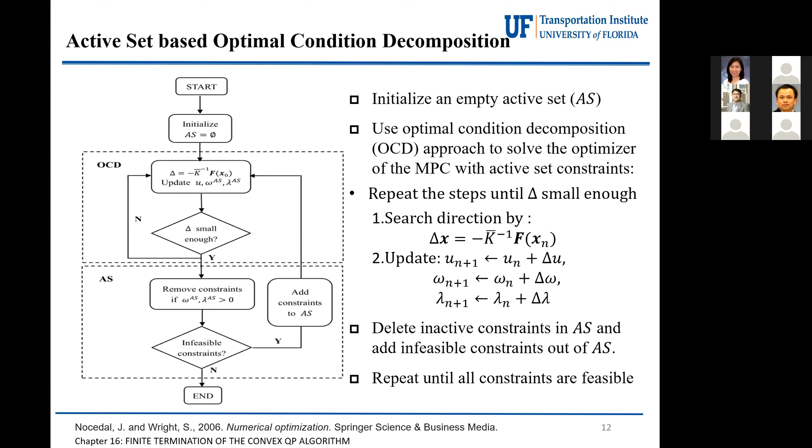And now we are done introducing all the MPC model. The next step, I want to introduce our online learning approach.

Recall that we want to develop the collaboration between two PCC-based platooning controls. And we want to have the CEV in the picture. As the example shown in the slides, we want to have the CAV n+1 predict the response delay of the human driven vehicle HDV m-hat to the movement of CAV n. Using the historical trajectory data, the CAV n and the CAV n+1 can collect it. Of course, we don't know the delay, and their aggregated value involves an unknown number of human driven vehicles.

Traditionally, we can use a curve matching algorithm to solve this problem. However, when we implement this approach on the urban street, it won't work very well because it needs a long warm-up time, and for relatively short streets, we are not able to do that. So we think about developing a new adaptive online learning algorithm.

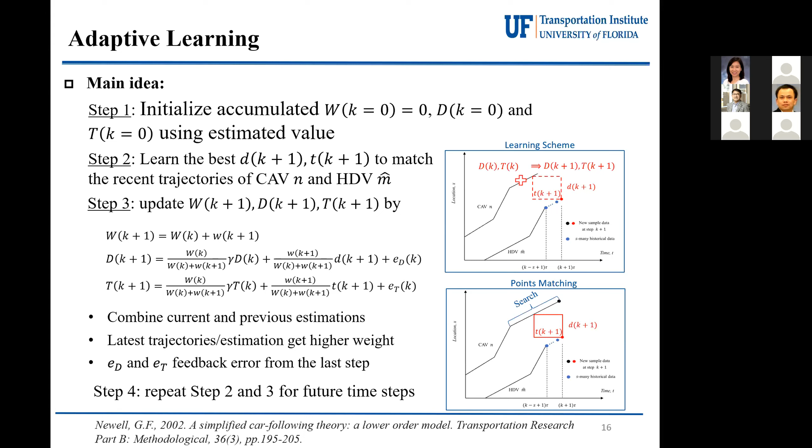By the way, this adaptive learning process will integrate with MPC control at each time step. Then, using the slides, I want to show the numerical experiments to demonstrate how efficiently this algorithm we developed implements our MPC control.

We can see with a long prediction horizon P equal to 60 seconds, our ASOCD algorithm can efficiently solve the problem within 1 second. At the same time, the MDBB algorithm can help us find the optimal splitting points, also within 1 second.

I want to use these numerical experiments to show the merit of our PCC-based e-driving. We compare our approach to the CACC approach in the literature, covering scenarios where the platoon meets a green interval or a red interval. The results show that our PCC-based e-driving can smooth the traffic much better than CACC, and it significantly saves emission and energy consumption, on average about 60% above or below, depending on whether it's on a green or red interval.

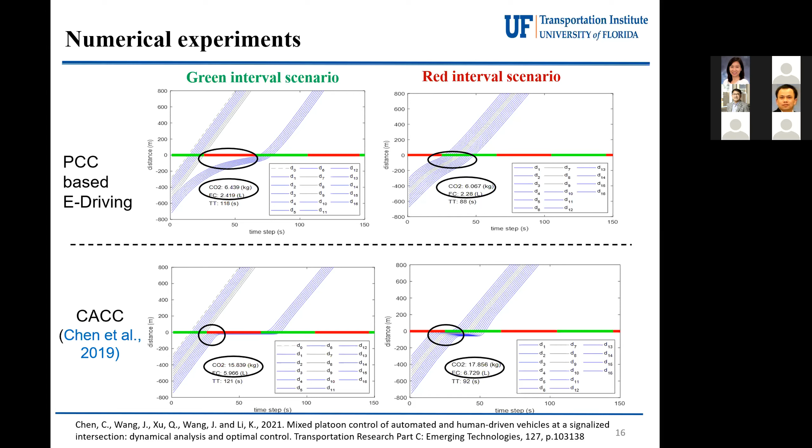With this, I'm done with the presentation for our scenario where the platoon goes through the intersection. Next, I will present one more scenario, which is AI-aided cooperative lane change for platoons under PCC.

Once a platoon is driving on the road, it's very possible that some other vehicle wants to cut in or merge into this platoon. Our study aims to give platoon-based control so that the platoon can smoothly split at some point, allowing those two vehicles to move in.

Our first consideration is that the lane change request should be sent by the subject vehicle, and then the platoon needs to decide what's the best spacing and timing to accommodate this request.

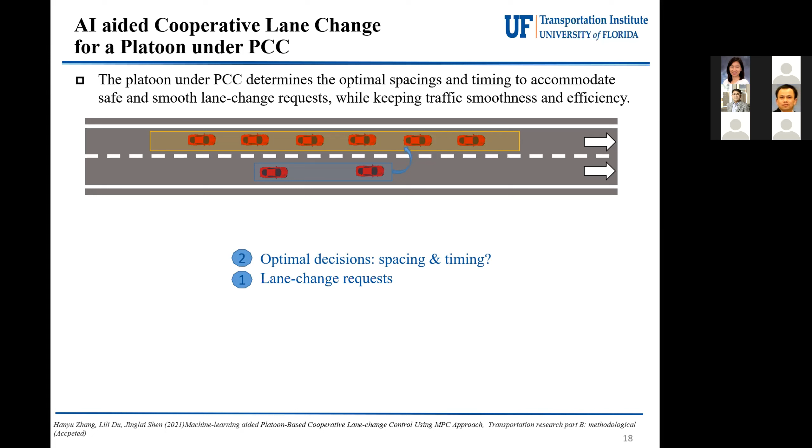To find this optimal spacing and timing, we consider that the platoon is under certain features such as speed, spacing, number of platoon vehicles, and similar factors. With this as input into a machine learning model, we can roughly estimate the potential candidate spacing and timing for these two vehicles to cut in. Then, combined with an optimization model, we can find the optimal spacing and timing to accommodate these two subject vehicles.

After that, we implement our PCC control to enlarge the position of the best spacing so that the other two vehicles can smoothly cut in.

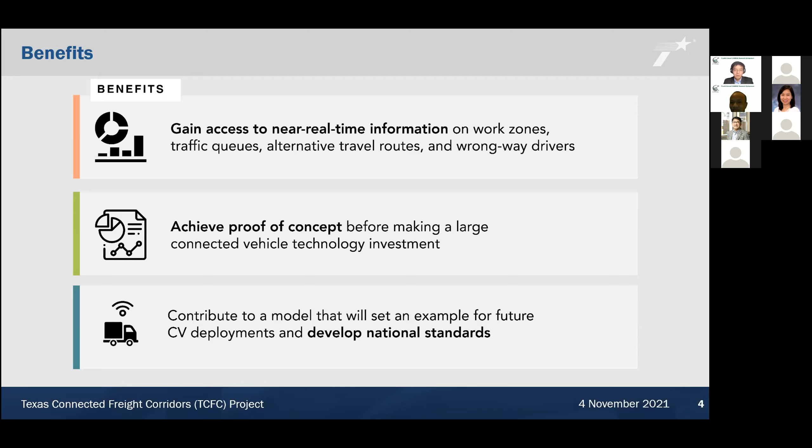There are some immediate benefits too. For example, with deployment of connected vehicle technology on the triangle, our freight partners will get access to real-time information on work zone situations, traffic queues, and other safety critical warnings and alerts. This pilot will also allow us to explore different deployment models and see what kind of situations we need to address. Last but not least, through this process we can develop associated standards and specifications, set an example for future large-scale deployment, and hopefully contribute to national policies and rules.

This project is funded through USDOT's ATCMTD grant, the Advanced Transportation Congestion Management Technology Deployment project. It's a program that USDOT initiated to fund emerging technology projects. We're the Texas Department of Transportation, a recipient of that grant, and we're working with our 3 partners: Texas A&M Transportation Institute, Southwest Research Institute, and UT Center for Transportation Research.

This project includes 3 phases. The first phase started 2 years ago in 2019, doing high-level design, planning, and CONOPS. We're currently in the second phase, doing detailed design, app development, procuring security credential management systems, developing a connected vehicle data framework, and engaging our stakeholders.

The third phase will be once we get these applications loaded onto our OBUs, which will be installed in trucks, and RSUs installed along our triangle. We're going to do operations, data collection, and evaluation to see how well these applications perform and how truck drivers or end users perceive them. So this is basically a high-level overview of our project timeline.

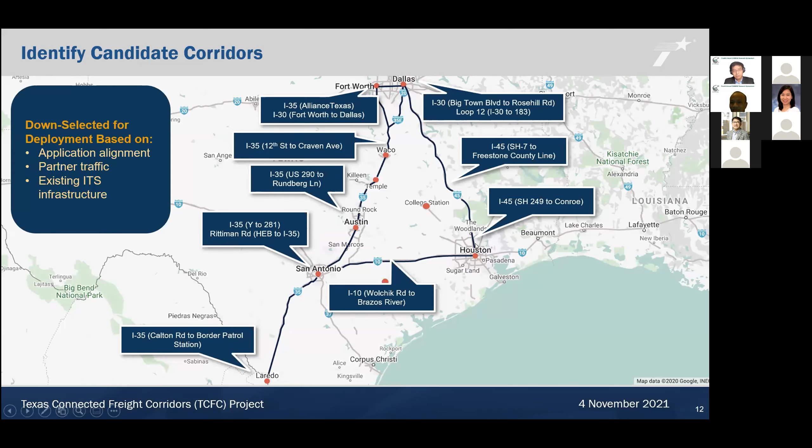These are the sample sites that we identified to deploy this, and then the phase 2 activities were here.

We're procuring OBUs and RSUs, onboard units and roadside units, and developing 5 applications, and procuring a security credential management system. Initially, we planned to procure the connected vehicle data framework, but after researching the market, we feel it might be better to develop our own instead of procuring market solutions that are still maturing.

We're working with our partners to prepare deployment and training. Next week we're having 2 training sessions, one for public sector stakeholders and one for private sector stakeholders. For public sector, we developed training specifically for our operators, especially from the traffic management centers, on how they manage the RSUs, gather data from them, and perform monitoring of the devices.

For the private sector training, we're going to train them on how to use and maintain the OBUs once installed on their trucks, and how we get data out of it for evaluation purposes. That's basically the main tasks, but we also have other stuff going on.

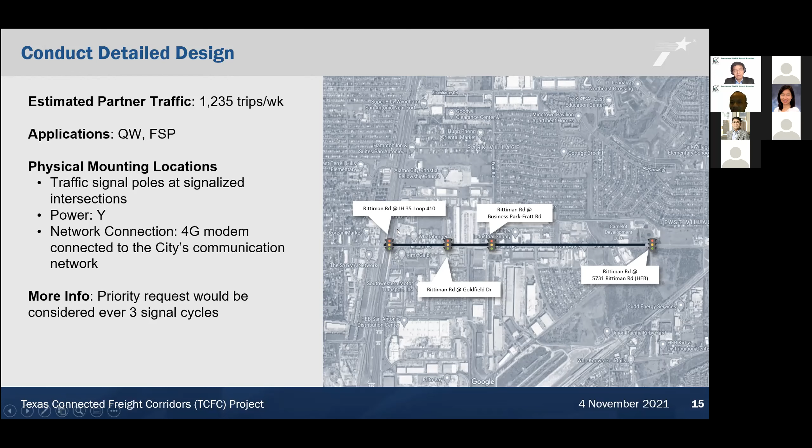For these signals, we feel that if we could implement freight signal priority, giving priority to freight trucks, it would help address some mobility issues and provide benefits, since trucks with fewer stops have less emissions. Queue warning is also one of the applications we plan to deploy along this stretch.

These are the devices we're using, for example right now CV2X, cellular vehicle-to-everything. Many of you are probably aware that CV2X is the technology we're moving towards, because before we've been using DSRC, dedicated short range communications.

DSRC has been researched and piloted, and some states have deployed DSRC units to implement, for example, transit signal priority in Utah and Salt Lake City.

In this project, we're mainly focusing on CV2X, but some of the RSU units we're getting will have dual mode, meaning they can broadcast both CV2X and DSRC.

These are the in-cab telematics providers we mentioned. We're not working with them directly, but we're working with Drivewyze. Drivewyze has a contract relationship with Omnitracs, and we incorporate our applications into the Drivewyze app system. They install Drivewyze on the Omnitracs units so we can disseminate alerts and warnings to truck drivers, like work zone warnings and queue warnings.

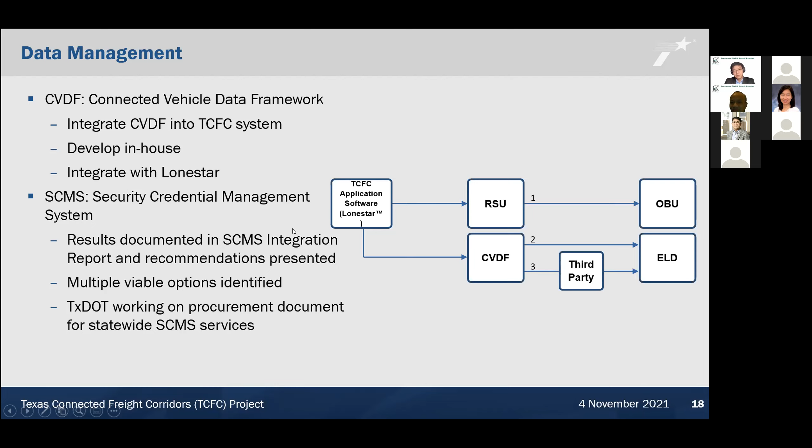Also a security credential management system, because that's an important piece we wanted to incorporate into this deployment. In the real world, you have to ensure that everything you disseminate is trusted. How do you know the messages or information received from RSUs are from a trusted source? Nowadays, cyber attacks and cyber security issues are not unusual, they're here every day.

It's just like any computer system. If, for example, connected automated vehicles leverage this kind of information, alerts, or warnings to negotiate, and a hacker gets into the system, sends fake messages, or blocks true messages from being sent, that would create a life-death situation.

That's why we wanted to implement this security credential management system first, to ensure that all our information, alerts, and messages sent through the RSUs and OBUs can be trusted within the system.

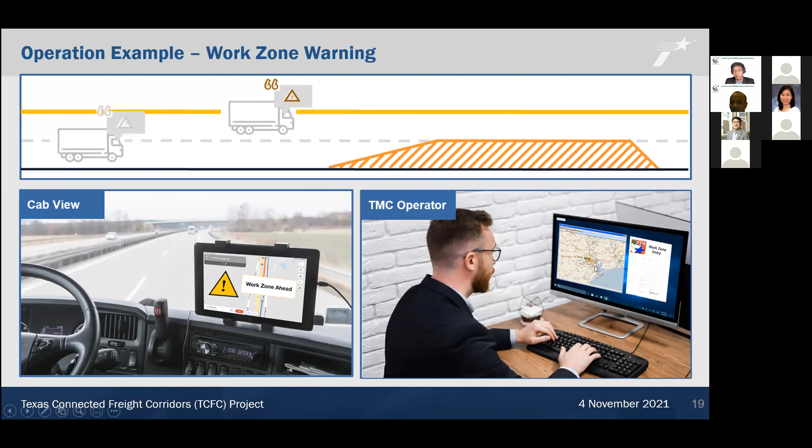This is just an example of the work zone warning and what it looks like in a cab, and what it looks like in a TMC. That's kind of the second phase.

The third phase, the next step, is we're going to wrap up the application development, and we're also going to finish up the connected vehicle data framework. We'll also work with our fleet partners and our district sites, trying to do site visits, because we've identified the locations.

We had to do site visits, but due to COVID we were not able to do much travel. So we're going to do virtual site visits using Google Street View, and then go down to the site to see if it's really the ideal site.

We're also going to work on how many RSUs and OBUs will be assigned to each of the districts, each location, as well as how many OBUs each of the fleet partners will be getting. We also do training, trying to get them ready for the deployment.

Last but not least, after we install all the systems, we're going to operate the system, gather data, and evaluate it. In the first phase we developed an evaluation framework, so we're going to gather data and evaluate how well these systems perform.